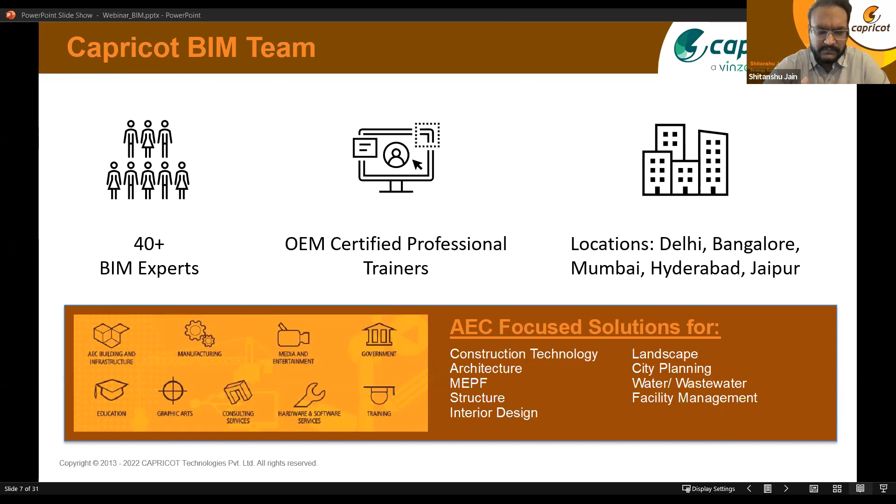So with this, the idea behind today's workshop is to demonstrate, first of all, because we have people from multiple domains and multiple knowledge levels in this workshop.

So first, to bring everyone on board at the first level, what is BIM, and then how it can be leveraged for projects across the life cycle, ranging from a building to an airport, for example, to a mass transit project, and how we put all the data together on one single platform so that, especially in large infrastructure projects, the data can be leveraged for better outputs.

What is the key concept of BIM? How does BIM work? What does it basically give us? It gives us a single coordinated model. This is a snapshot from one of our projects which we are going to show you - a tunnel project where we also place services, and multiple stakeholders have already collaborated. This is the kind of workflow we try to create - a single coordinated model where multiple stakeholders have already given their input.

So now the question arises, who can work on it? The designers team, engineers team, contractors team - all together can work simultaneously at the same time and can keep on adding inputs to the single coordinated model. Since it's a single coordinated model, how does it work?

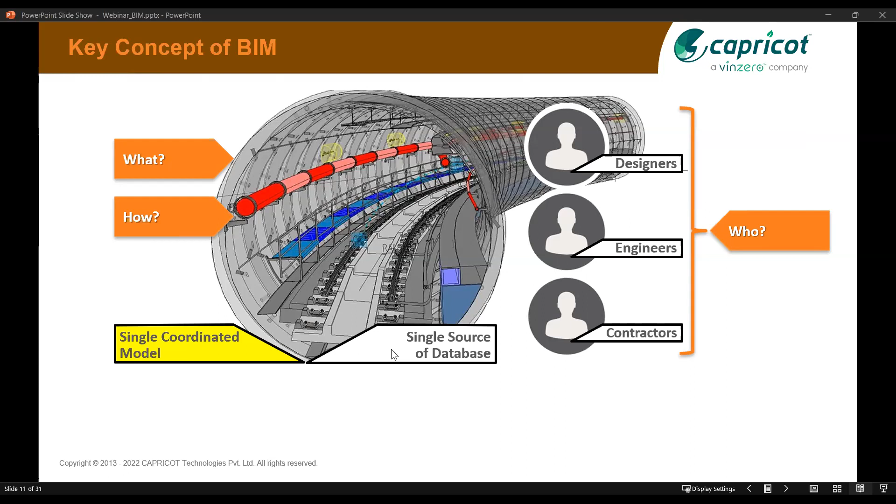Since it's a single coordinated model, it's a single source of database. That coordinated model is also a database which can be used for further analysis, simulation, or maintenance purposes. Everybody has the same - what we call a single source of truth. So everybody has their own truth - like I'm a designer, my truth, and for example the contractor's truth or any other stakeholder's truth - everybody's truth is the same. So everybody is actually extracting data or adding data to the same model. They are collaborating on the same platform, which is mostly now done on the cloud, because people might be in different locations, so it is done on cloud.

Now another question arises, when can we work on BIM? Like I mentioned earlier, from the design, that is the conceptual design stage, to the operation and maintenance stage, BIM can be used.

So that is the key concept of BIM. What type of project can it handle?

Today we are mostly focusing on infrastructure projects. These are different kinds of projects which can be handled, like road design. This is one snapshot from road design, where you can get quantities and analysis of the road. You can also design railway tracks, railway buildings, railway stations, and work on railway utilities and services like pipes, OHE services, or electrical services for railway. It can also handle site level services, basically utilities and buildings.

BIM can be used from a smaller building block to the entire cityscape.

Now European countries have actually come up with this concept called CIM, while we are talking about BIM. They have come up with this concept of CIM, which is city information modeling, so they are developing the entire city on BIM.

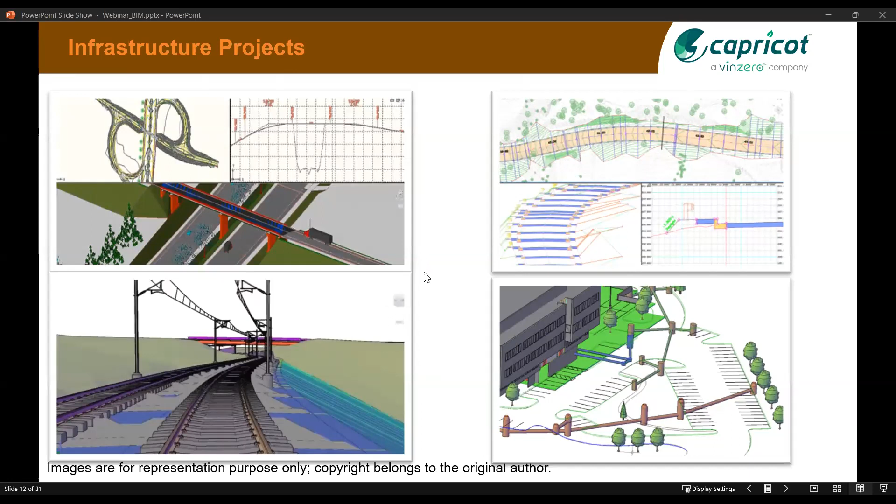Now I'll talk about building projects first. For building projects, we have taken up one small station project, only for demo purpose, which I'll show you. We are starting from building projects because I'm an architect, so I'm starting from the building perspective, and then I'll move this webinar towards infrastructure.

For building projects, for conceptual design we are using FormIt. Formit can be used for setting up the location, capturing existing terrain, and developing conceptual form. But for capturing terrain, it can only capture up to 20 miles, its extent is actually 20 miles.

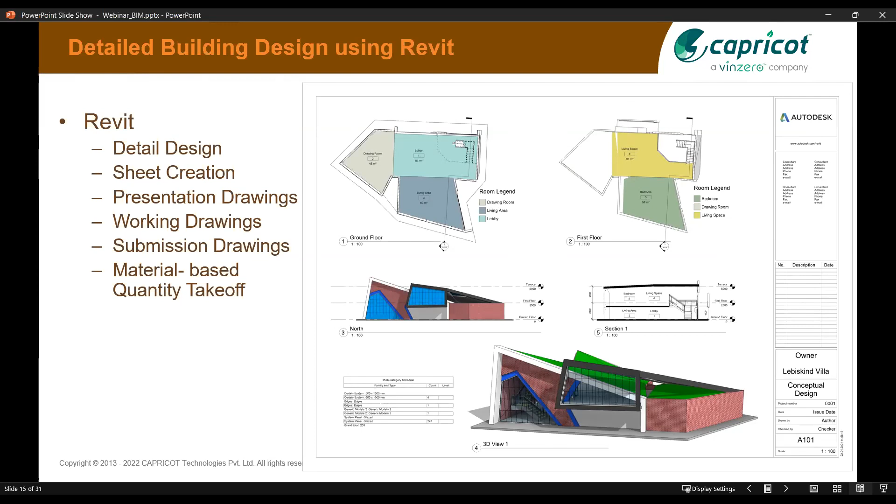So I think I should now move on to a live demo of these softwares. I'll just share my other screen, please allow me a minute. Abid, please confirm when my screen switches. Yeah, I think it's visible.

Okay, thank you. So this is the interface of FormIt, I've just opened it, so this is a fresh file. As you can notice here, it has generic options which we have in other software also, like file, edit, and others. On the right side, we have additional tools which can be used for tracking your progress, in terms of area. You can also set up FAR, so if you have a targeted area and site area, and it exceeds the site area, it will show accordingly in FAR here.

So you can set up location. For setting up location, we can go for the location option here, or SL is the shortcut. I'll not go into detail, but I'll just show you, you can just search for the location.

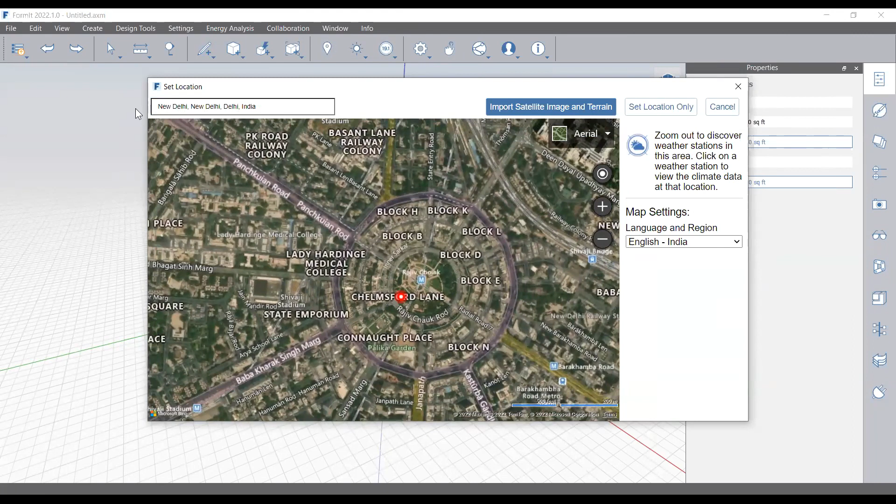For example, here I'll search for any location. Let's say I'm sitting at Delhi now, so I'll go for New Delhi. Suppose it has taken some central park area. I'll just go for Green Park, where our office is located, near Hauz Khas. Suppose you already know where your building location is, you can set this pointer according to wherever that site is located. This would be the origin point for your site, and your site will start developing.

And then you can import terrain and imagery accordingly. So I'll set up this much of location. You can just zoom in and zoom out for setting it up, and I'll import it in FormIt. I think this much of area is fine, so it will take a while to set up this location.

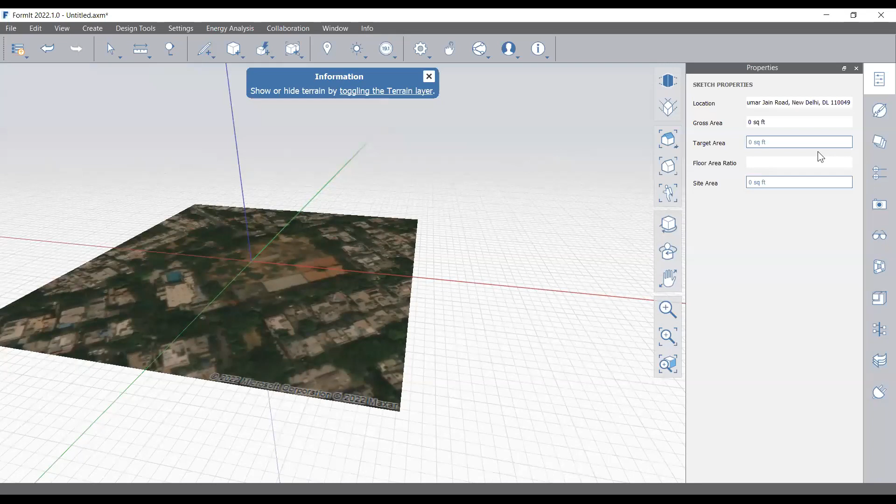As you can notice, since it's a Delhi area, we have lesser contours here. If I go to the layers, it has layer management also, and it actually adds up the contour layer. If I had taken some hilly areas, the contour terrain data could be kept. Layers are added, you can add more layers here and start modeling.

Now, as you can notice, location is set. Then you can also set up the site area. Let's say my site is 1500 square feet. I'm just taking a smaller site, or maybe let's go for 5000 square feet. And then I need to start. You can start by placing a few solids, or maybe you can start by some other method.

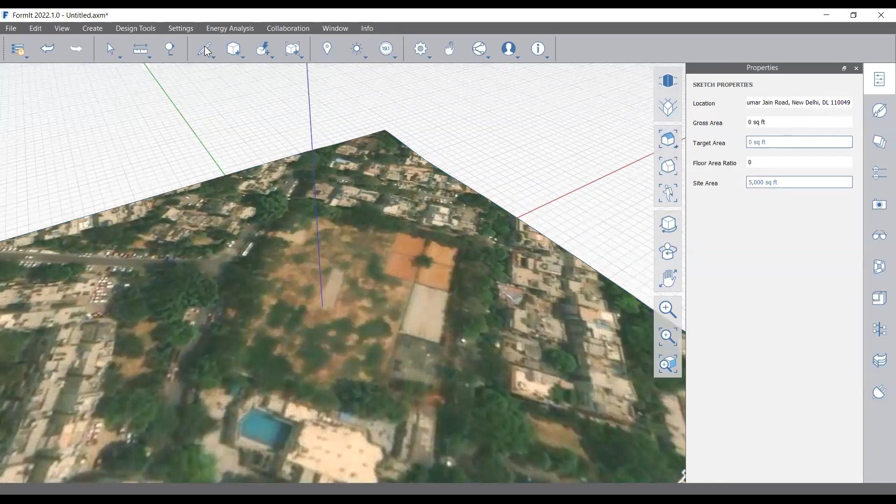So I'm starting with simple lines, and since this project software is being set in feet and inches by default, and I prefer working in meters, I can just hit the tab key to give these dimensions. It's a 1:1 scale thing, it doesn't distort according to scale.

I need to go for 5 meters on this side. So I've just written down 5 m, I'll click OK, so it's that kind of dynamic input. Sorry, 5 meters is very less here at this location, let me start with a rectangle. I was just showing, I'll switch off terrains. So this is that line which I created.

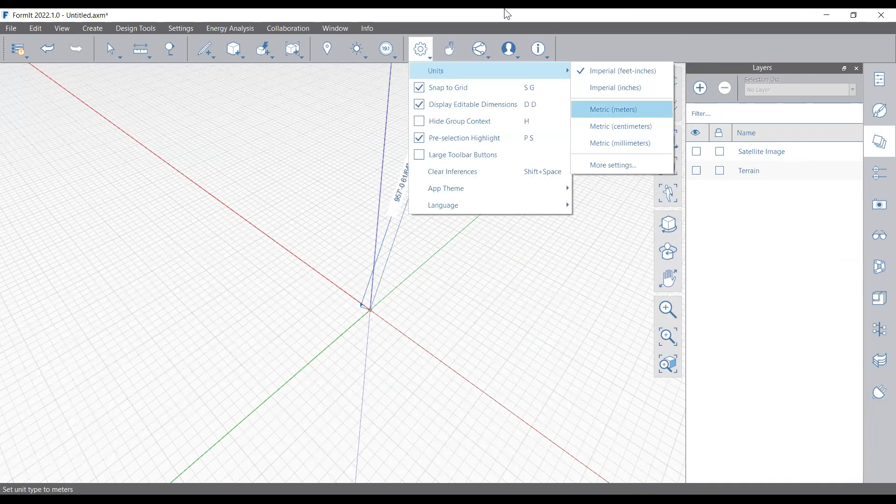I think I should start from the origin just to make the screen more visible. I'm starting from the origin, and you may change units also, that is not an issue. I'll change it to metric meters, and for example now I need to give units in feet and inches, then you can hit tab key and change the units. Anyways, I'm going for 50 meters on this side, let's say it's huge.

In SketchUp users also do this. Like you can say this building is 15 meters high, for example. Suppose this portion of the building needs to be shifted back, suppose there is something, so you can just manipulate your form.

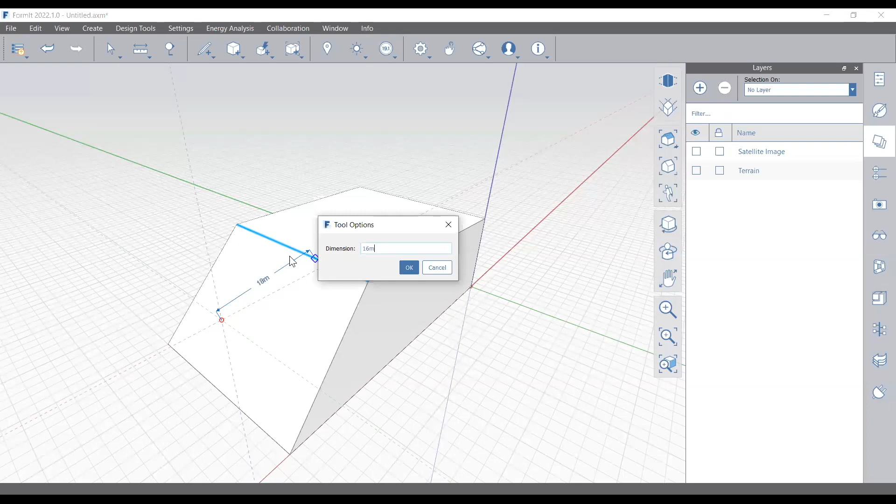Just allow me a minute, I'll just try and reconnect. I think this time it would be better, I think voice will not break again.

I hope. Anyways, suppose I have added a few lines here and I'll just remove this portion, so you can go for the entire deconstructivism mode, architects actually use this term. Now, for example, if I delete this, the entire surface has been deleted here, by mistake. So I'm just keeping this mistake on screen so I can show the solution also.

So for that, you have this cover option available. The thing is, you can do many things here, so I can just cover this. You can select these options and just finish this off. It is being covered, and then you can add levels to it.

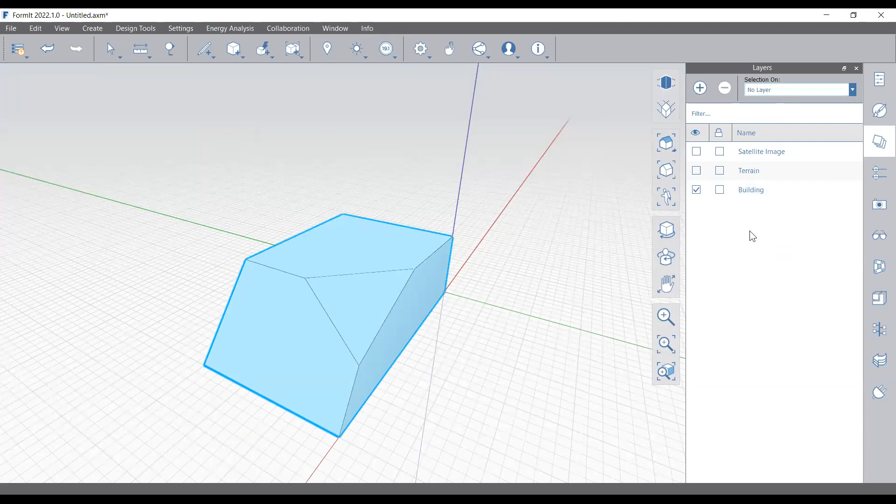For example, I need to add this to another layer. I'll select all of this and add it to another layer, I'll call this layer 'building'. So now I'll add this to the building layer. Now I can switch off building also, and switch on terrain and satellite imagery as well.

Then, for example, I need two levels because in Revit, for design development, levels are required. So I'll just simply add levels here. The first level is added at 0 meters, or maybe if it's the plinth level, then you can go for 600 mm. I'm just giving inputs in mm, and it has converted to meters automatically.

I can add one level at a time. Another level is at 3 meters, or maybe multiple levels altogether, for example 5 levels at 3 meters each, or maybe 3.5 meters each. Right, so multiple levels are added, and now our building should also detect those levels.

I'll select the building portion and go to the properties, then to the levels, and I can add these levels to the building. So use levels, and as you can notice, level-wise areas are shown. The idea is this much volume the building is taking up, this much area, that is the total gross area in square meters, and floor-wise it is getting area.

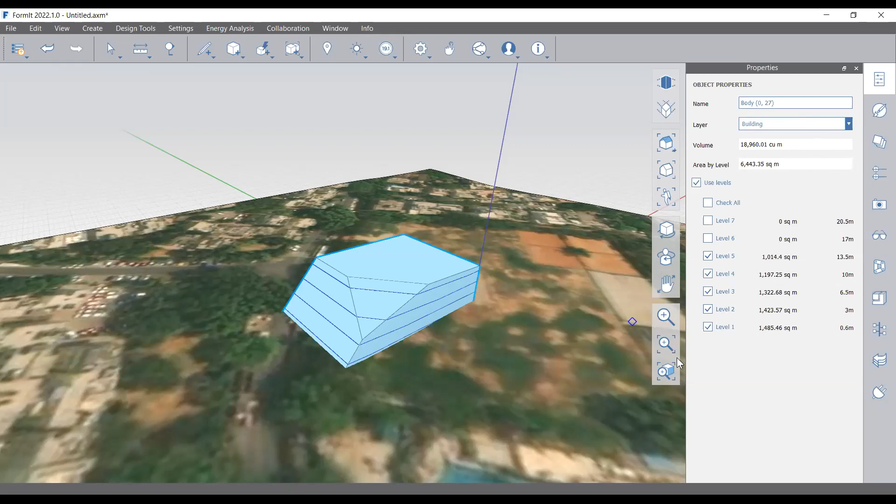My building form is actually gradually decreasing upward, so as you may notice, the area is also reducing as we go up. On the 5th floor the area is less, and on the lower floor the area is more. So the idea is it also tracks floor-wise areas, and FAR is being automatically calculated.

This much site area I have set up, and this is the gross area I've got. I think there's some issue here, since I took a larger building. Anyway, I'll just change it - this is only for demonstration purpose. So this much FAR is correct, right?

Anyway, you can also add more things here, like materials. For materials you have this option, with a predefined material library, or you can create your own materials. So all the things you can do with any 3D software, you can do with this.

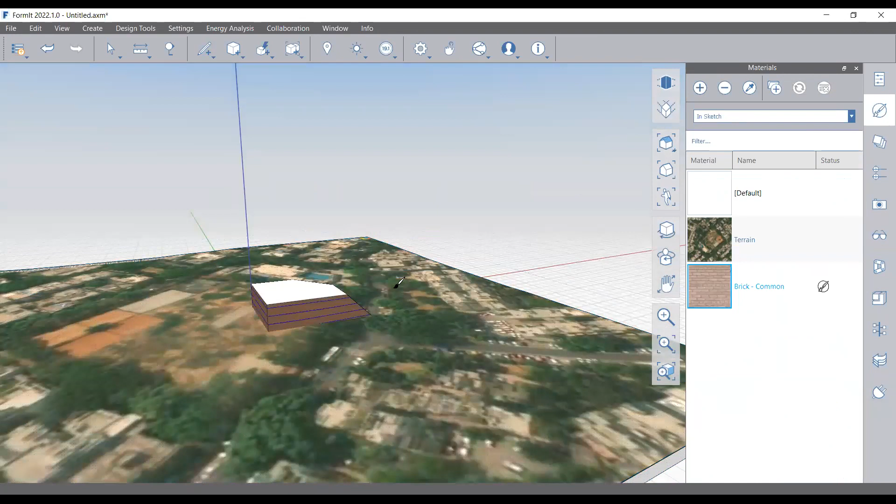These materials will not be lost when you take it into Revit. Actually, off screen I have developed another model already, so I'll just directly show that to save time. But I think you got the idea that it's a very easy software.

Later on, you can also run energy analysis and solar analysis on it. I think I should show that part. So you can switch on shadows, the sun editor, switch it off, and change its mode. You can choose different modes here, so I'll go for monochromatic mode.

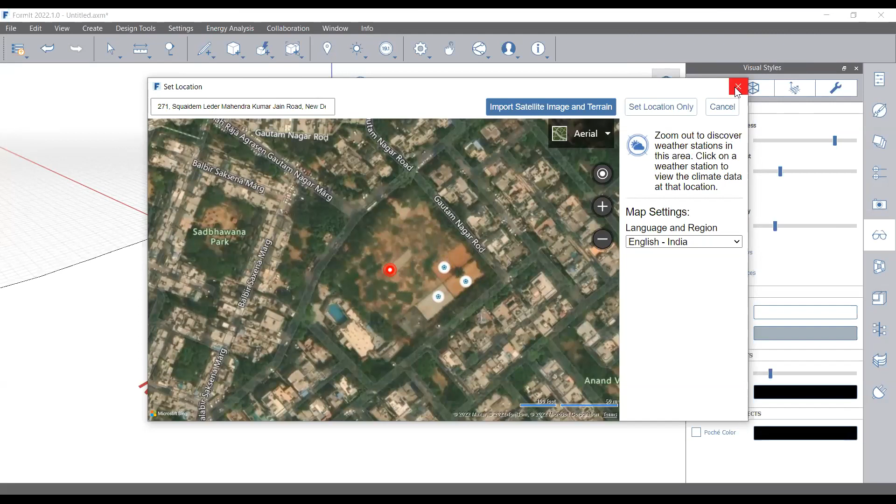Here you can see the sun input is taken - weather input will automatically update according to whatever location you set. When I was in the location panel, you may notice we also have weather information added. These small dots shown in blue color are weather stations, so weather data is automatically updated when we update the location.

Now, for example, if I need to run solar analysis on it, we can also do that. Someone mentioned in the chat that this feature is also in Revit - yes, it is, but for preliminary purposes we can run preliminary solar analysis here. Another advantage of using FormIt at early stages is that it's available on iPads as well, whereas Revit is not available on iPad. This is actually also available on iPad.

Like architects sketch on sketchbooks, they maintain small sketchbooks - those who have iPads can install this app called FormIt Pro. FormIt also has a free web-based version, but if you want all the features, since this analysis feature is not in the free version, you can buy the Pro version. So the iPad app has stylus input as well, and the stylus is pressure sensitive.

For example, if you press harder, it can allow you to push and pull your building - something like that, it takes stylus input as well. So the idea is those who have an iPad can use FormIt, run a preliminary analysis, and then push that model to the modeler or other team members.

Anyway, I'm running solar analysis here. You can set up the time - it has automatically detected, I think, the current date and time. No, it has detected something else. Actually, we need to set up the date.

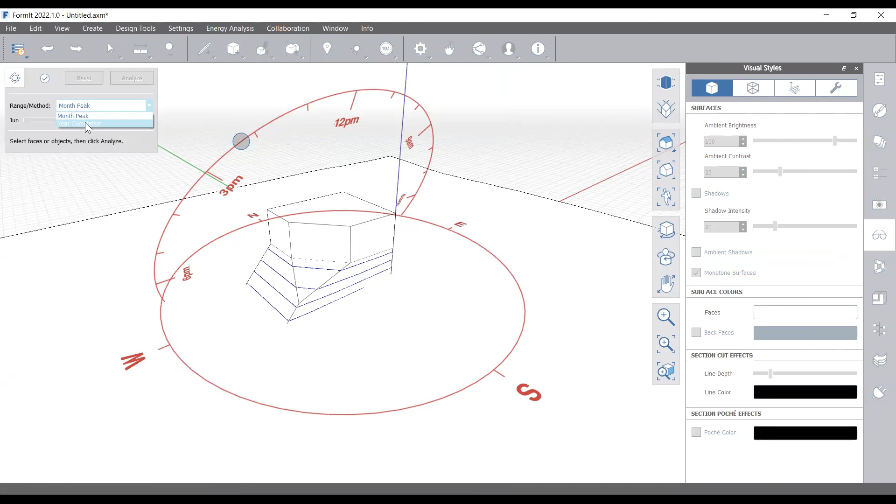Then I'll go for solar analysis, and we'll wait for a while because it takes the data online and gives you data back. You can go for monthly peak or cumulative - I'm just showing you cumulative here. If you're going for monthly, you can change the months from here, as you can notice.

I'm just going for yearly analysis, and I'll select all the surfaces of this model - I mean, all the surfaces. You can go for surface wise also, like at a time you can select one surface. I'm selecting all the surfaces, and I'll just analyze it. As you can notice, the surfaces which are selected are showing their results.

In this case, kilowatt hour per square meter, but if you are using imperial units, then it will show in BTU units as well. Then you can place these images in your presentation and can push your idea well. I think it will give you ground to defend your design. Anyways, I'm just resetting it - so this is the whole idea of using FormIt.

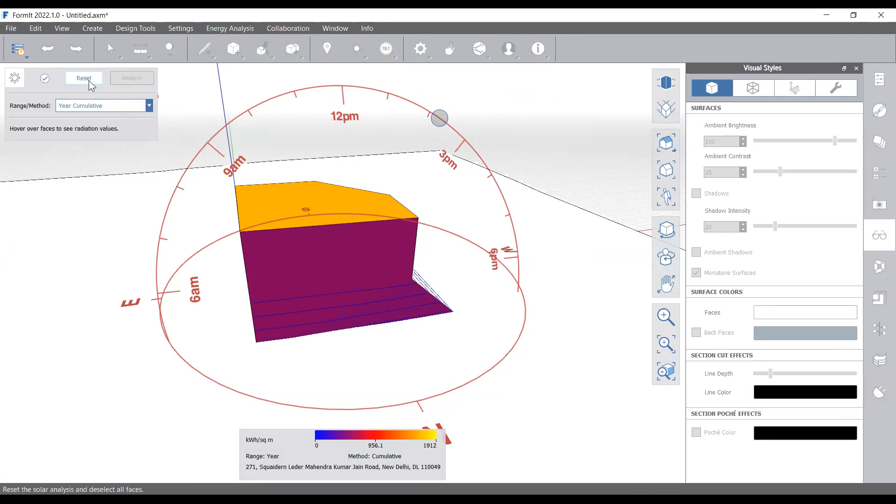I'll show you that building which we have already created in FormIt. I'll just simply drag and open it. Yes, so this is that building. I think sun input I should switch off here. Yes, so this is that conceptual block which I have developed.

Floor wise, I've also tracked its area, and now I need to take it in Revit. So you can save this thing on cloud as well, that is Autodesk Construction Cloud. So it takes up the docs part here, so you can save it directly on cloud.

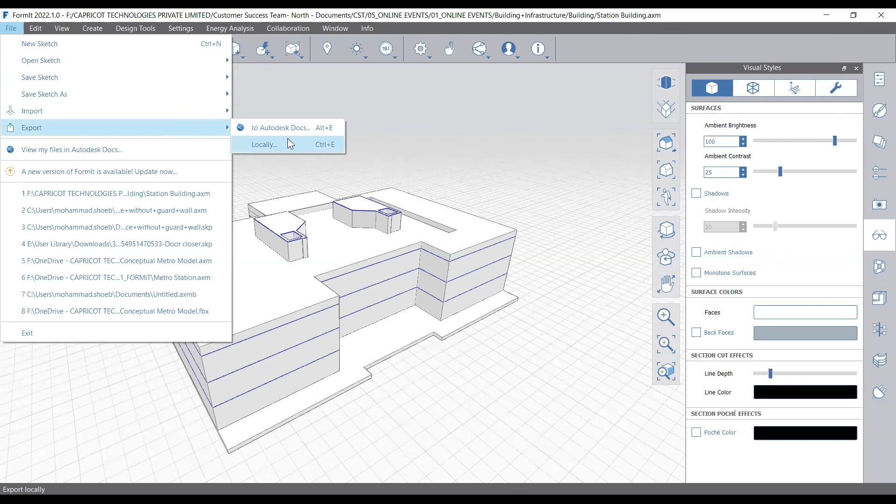I'll just share my Revit screen, I think, at this point. So I've already taken this in Revit, and I'll just switch my Revit screen. Abid, please confirm when my Revit screen will be visible. Yes, I think it is visible.

Okay, thank you. So the idea is that same building I've placed here, and I copied it multiple times, and then I've added material to it. There are detailed materials to it, details are added, then I've created one working drawing here.

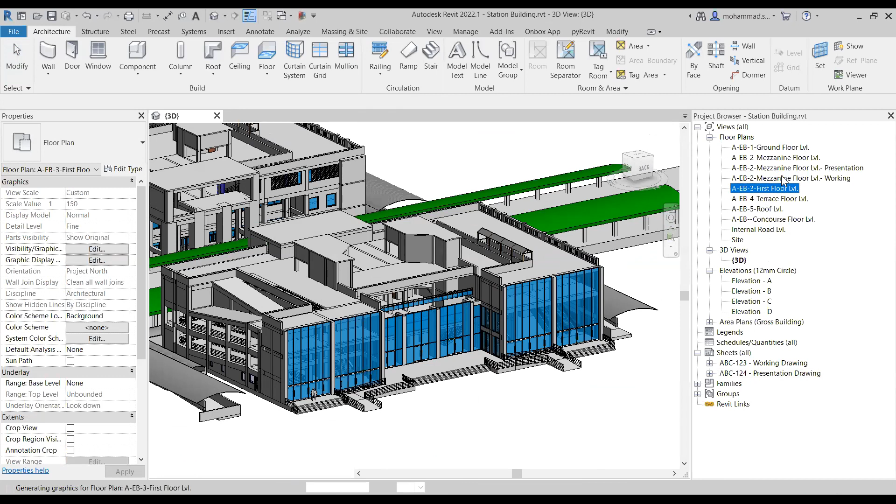I'll just show you that drawing - floor-wise drawings can be created here, right? Those levels which I've created already there, actually I've created levels in FormIt itself. So for example, I'll switch my FormIt screen again. So in FormIt, if I go to the levels, I've created levels in the conceptual design stage as well.

So these are all those levels which were required then, and then I took the same level inputs in FormIt, in Revit I mean. So in Revit, if I go to some of the elevation, you may notice that these levels are also present here, right? There are a few naming conventions which are changed, but the same levels are being used.

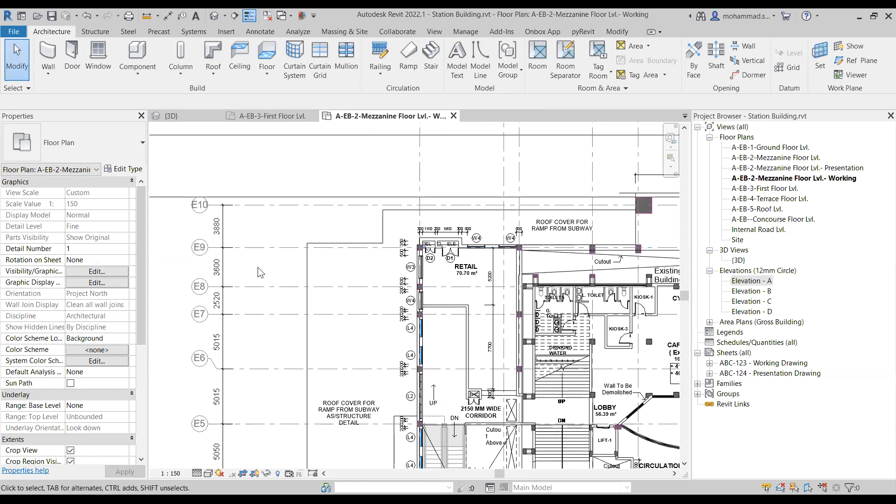So this is that drawing which I produced here, this is the working drawing output. I was also working on it, so you may find some errors here, because obviously this is for demonstration purpose only. And then presentation drawing is also produced.

And how do we produce presentation drawing? I may show one demo as well - for example, it is very easy, you can do it in few seconds. So if I, for example, duplicate this thing and it has no colors in it.

So for example, if you want to represent your rooms according to the colors, then you may simply go to Analyze tab, because it analyzes the spaces, and then you can go for coloring up your rooms, and I'll just simply click here and I can assign colors according to the rooms. Maybe if you have divided departments, you can go by department as well.

I've not placed departments here, I've only specified room names, so I'll just click OK. And according to the input, whichever room has been taken, for example, this is the cafeteria area, this is the lobby area, the different rooms are being colored automatically.

For example, if I'm not satisfied with some of the colors, suppose this cyber cafe type area is too dark, I can anytime go to the color scheme and can change it, right? So it takes up the dynamic input. Anyways, I hope you got the idea here.

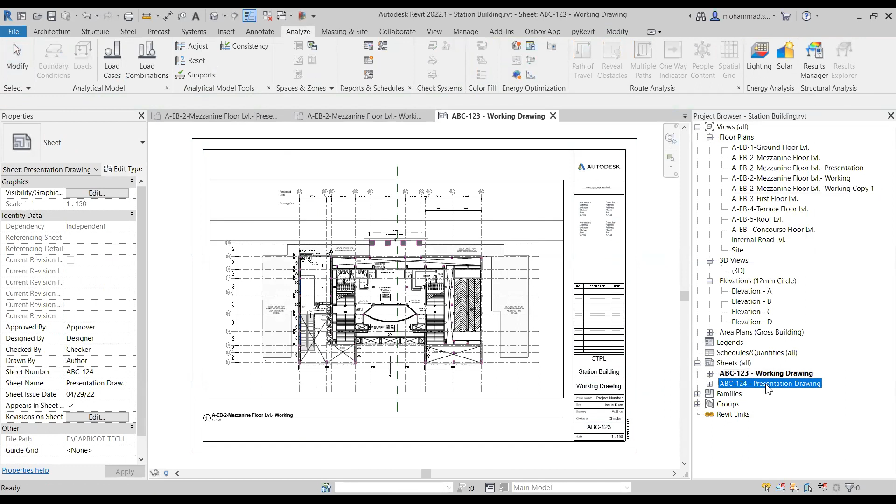Then I can take it to sheets also. So I've already created one sheet and can compose it with the title block, right? Then similarly, I've created this working drawing and this presentation drawing also. So Revit is basically a multidisciplinary software where you can take up your buildings and you can give inputs according to your discipline - as you can notice, it has tabs dedicated.

So for those who are new in Revit, I think I should explain. The architecture tab shows architecture related options. The structure tab has structure related options, like creating braces, trusses, rebar, and so on.

You can also place 3D reinforcement. Then there's a dedicated tab for steel connections for steel designers. There's also a precast connect option, available after the Revit 2020 version - this is Revit 2022 which I'm showing. The precast tab is for precast detailing.

Then we have the systems tab, which has an HVAC panel, a mechanical panel, plumbing and piping panel, and electrical panel. So it's a multidisciplinary tool, and you can insert multiple data types here. For example, if other consultants are working on CAD drawings, you can import those CAD inputs directly. If they are showing PDFs, you can import PDFs directly. You can link images, and you can link other Revit models too.

For example, I'm an architect, and if I need input from a structure team, I can link their structure model as well, and they can keep working on their model simultaneously. So it has that linking with coordination available.

Once every design is frozen, you can start producing sheets. The next tab is about annotating everything. You can produce sheets - I have already produced a few sheets here. You can also get quantities out of it; there's an entire panel for creating quantities.

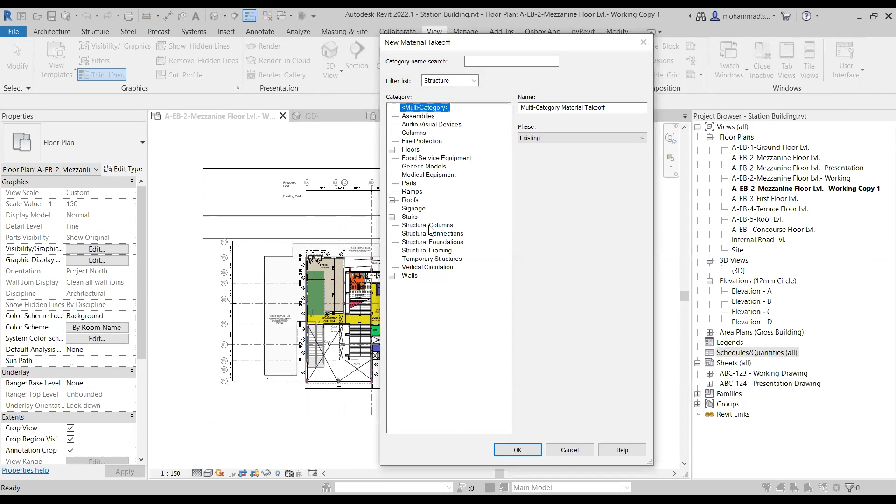I have not created any quantities yet, so let me create quantities for, say, whatever columns are used. For example, I can go for material based quantities. I'll take up material takeoff here, for structural columns specifically. This gets me column quantities, and I'll click OK.

This is structural, so I can take the name of the component - in Revit we call this a family, components are known as families. Then you can take material based inputs, for example, the name of the material used, the area of the material, volume of the material, and you can also add cost and so on. I'm just adding a few things here.

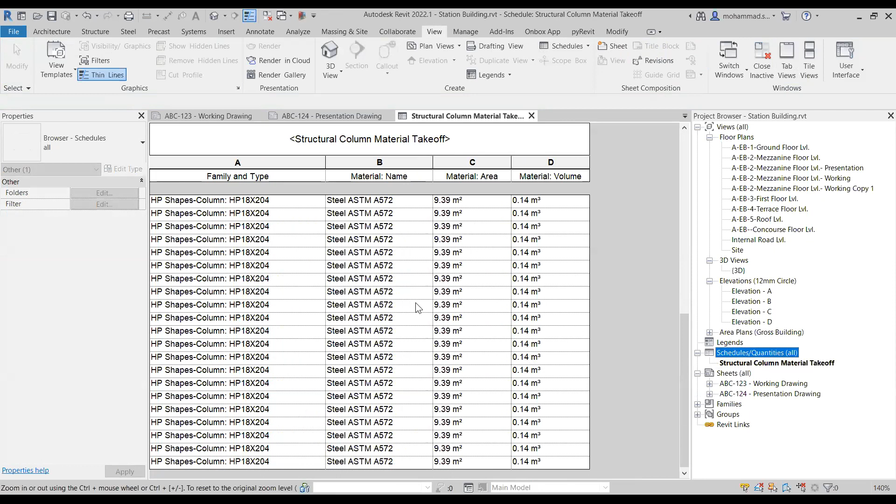So this is the entire schedule which is created, and you can anytime get a total out of it and use it in your sheets or DPRs. So it can get you material based quantities and material based cost also. That was all about Revit.

This same model is now integrated on Autodesk Construction Cloud, ACC, and taken up by my another team member, Mr. Abid, who is a civil engineer expert in infrastructure projects. He has taken this station building and developed rail around it, and developed roads around it.

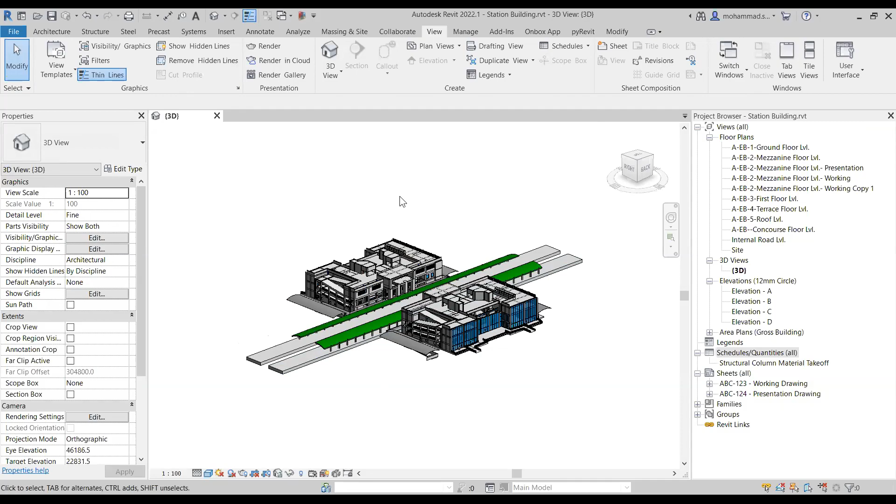I'll request Mr. Abid to take the session over. Yeah, thank you, Shiv. I'll just share my screen - please confirm it's visible or not. Yes, Abid, it's visible, okay.

Before starting the infrastructure project, I want to highlight a point. In almost all infrastructure projects, government organizations or large infrastructure projects are mandated to submit a BIM model, and only then do we get approval. Even when working on large infrastructure projects, we are dealing with large amounts, so we need to do a preliminary level DPR. For that, we need to do a preliminary survey, then go for the infrastructure modeling part.

Let me switch to the next slide. As I mentioned, the preliminary survey itself is the biggest task in government organizations or other organizations, because first, as a person, we need to visit the site, then capture the contour data or identify major important structures, then start working on it. So when working on an infrastructure project, the first idea is we need to capture the existing site conditions to work on a 3D model in real world context.

For that, InfraWorks will help you capture 3D terrain data in real world coordinates with the help of USGS satellite surface. As you can see in this image, I have captured one of the project's data - I'll show you a live demonstration as well. Later, whatever model we have captured, we bring into Civil 3D for detailed terrain analysis, terrain model, and contour map generation.

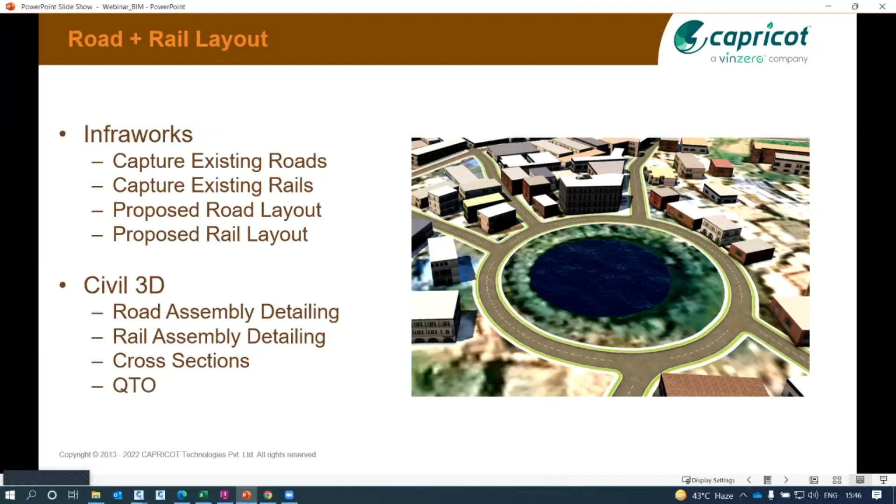Right now, I'll shift to my other screen for the InfraWorks demonstration. I hope my screen is visible. Yes, it's visible. So this is the typical interface of InfraWorks.

On the left hand side, we have an option called Model Builder. In day-to-day life, most of us use Google Maps or Google Earth for daily travel or whatever the purpose may be. Pretty similar to that, we can launch Model Builder and search your project location by specifying the project name or by specifying the coordinate system of that site. For this example, I'll just search and take an example of Mumbai.

I want to capture the area of this site condition to construct an underground tunnel. I have multiple options to capture the data, either through a rectangle or by drawing a polygon. For this example, I'll take a rectangle to demonstrate. I can capture up to 200 square kilometers of data in one go, but we can collect multiple pieces of 200 square kilometers of data and merge the entire data into a single drawing for large infrastructure projects. As of now, I was trying to capture an area of 30.98 square kilometers.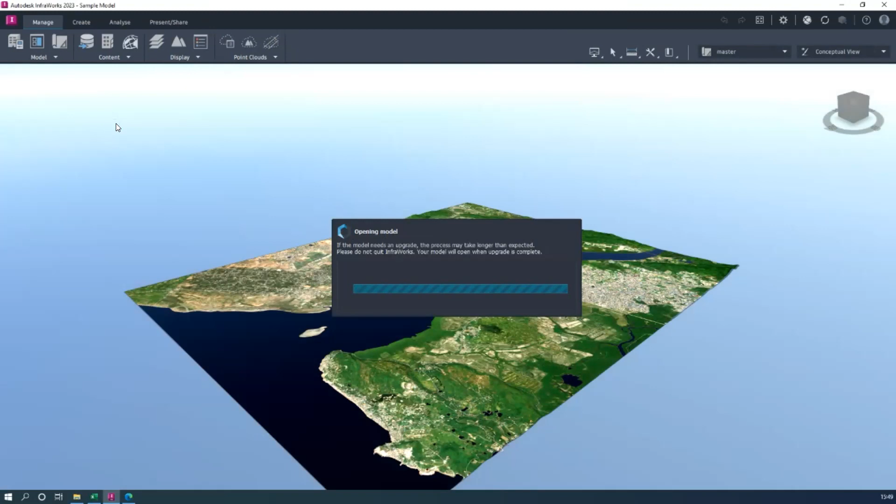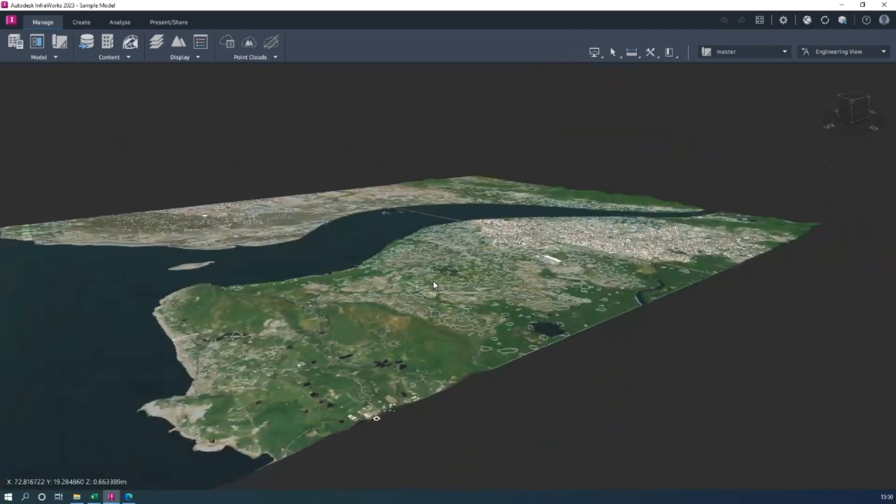Now this is how my InfraWorks model will look like. You can see it's not only a 2D satellite image, but actually a 3D model. To understand it in more detail, I'll switch to engineering mode. It will highlight the contours captured from the USGS server. Even in this city area, you can see the existing building structures which have been captured along with the site contour elevation values. I've also created one more typical view just to create a brighter environment. Now you can see more contours and a different contour interval compared to the previous view.

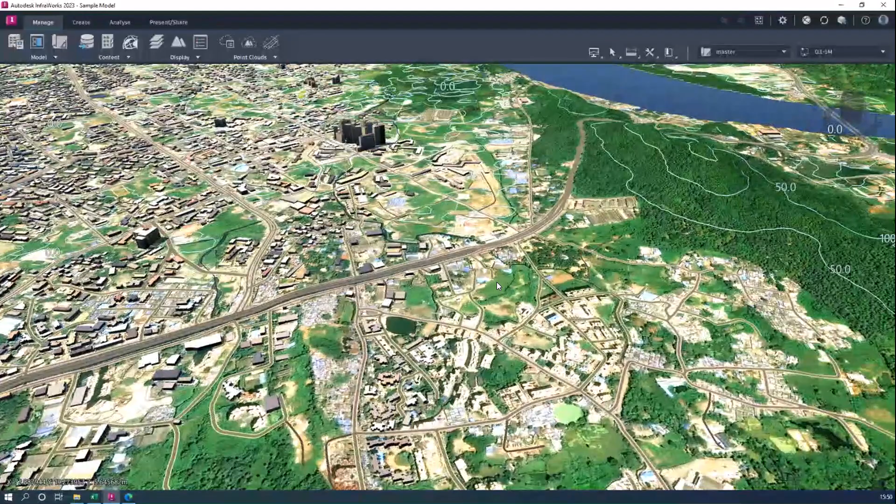These are the existing buildings which are automatically processed by InfraWorks. Wherever existing buildings were there on the site, the entire model is captured, including your existing railway alignments, road alignments, and also hill and terrain regions, river portions, which have been located via Bing Maps. I'll switch to the conceptual view again and go to one area with a roundabout - this roundabout has been captured and prepared by InfraWorks itself.

You can see the planning roads and the existing site conditions are all automatically captured. Even when I hover over any particular road, you can see a name stating that this road has been captured from OpenStreetMap, with the name Fatak Road.

You'll get a brief idea of which alignment we are capturing. So I'll switch to another view, road planning. Now you can see by default in InfraWorks we have two different types of roads: one is my planning road, and the second is my component road. What is a planning road?

Planning road is nothing but a center line alignment of a road. So when I import a planning road, which has been modeled in InfraWorks, to Civil 3D, I only get an alignment. I won't get any corridor or cross sections out of it, because the idea of this model is only to create a center line alignment.

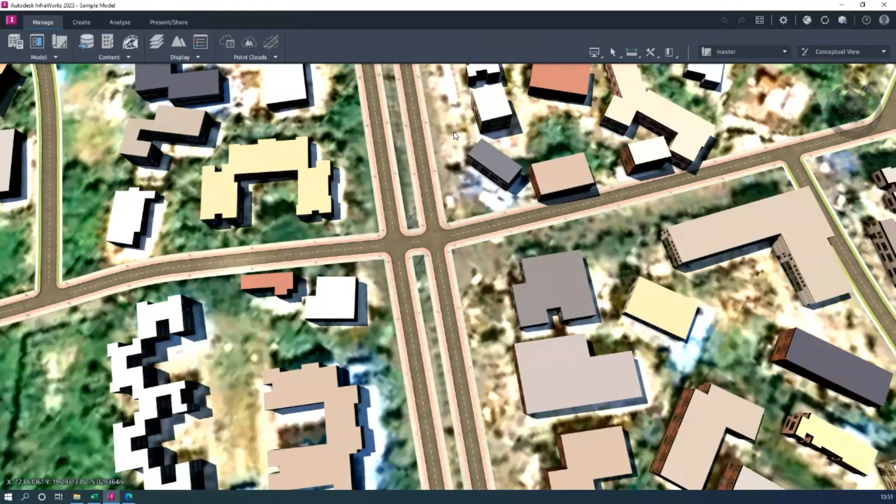So when I select any planning road, on the right side I have a palette called the property palette, though it should really be called a style palette. When I go to the road style, I have different options: divided highway, sidewalks, tunnel. Any time you think the existing road isn't captured perfectly, you can switch the style from 2-lane to 4-lane.

What I will do is convert this planning road to a component road. When I convert it, I get more detailed design options compared to the style palette which I had received before.

Now you can see the attributes. The target speed of that particular road is 40 kmph, and you can turn on the super elevation, which will use metric standards. By default, the grading width of that site is 5 meters, and you can switch to fixed slope and adjust the cut-fill grading criteria as well.

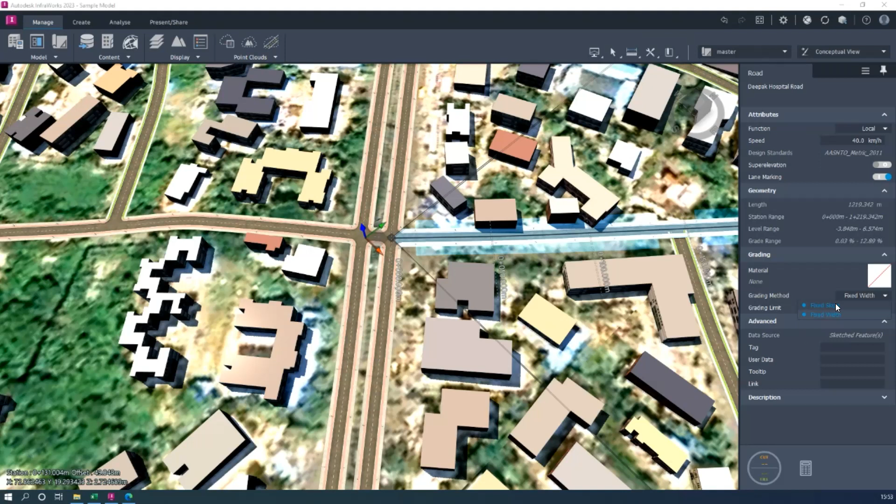I'll now zoom to another location. Here I've developed one rectangular region at this road for an interchange part. I've added a simple rectangular tunnel structure, and I'll show more detailed tunnel projects as well. The idea here is that when you're in idea generation or concept generation stage, you can use the InfraWorks model for detailed superstructures and underpasses of that area.

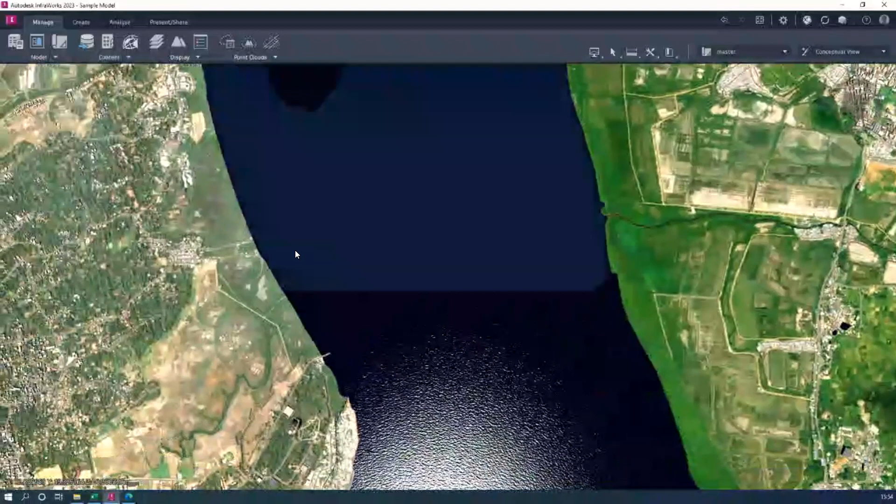So I'll switch to another view. Just allow me a minute. As I mentioned, right now I want to plan a component road region in this particular place.

So what I will do, when I go to create, I have two options: either create a planning road or go with a component road. What is a planning road, as I mentioned? If I'm in idea generation and not sure whether to go with a 4-lane expressway or an 8-lane expressway, at that point I can use my planning road for representation purposes.

Later I can convert that road to a component road and make more design changes on top of it. But for this demonstration, I'll just take a component road to explain the process. So let's suppose I want to plan a road. There are two methods: one is the PI-based method, and another is the element-based method.

I'll start with the point of intersection method, where I've selected my 4-lane assembly. Even when working with a 4-lane divided assembly, later you can switch to 6-lane, 8-lane, or a 4-lane depressed median assembly, which can be modeled and replaced easily. So I've selected a 4-lane assembly with raised jersey barriers, and I want to start modeling.

I want to start modeling from here. This is my center line alignment, which goes approximately here. Now when I switch to the curve, you can see a curve has been added automatically. This is a spiral curve. With a right click, you can convert it into a normal circular curve, but most of the time in India, we prefer to work with the transition curve.

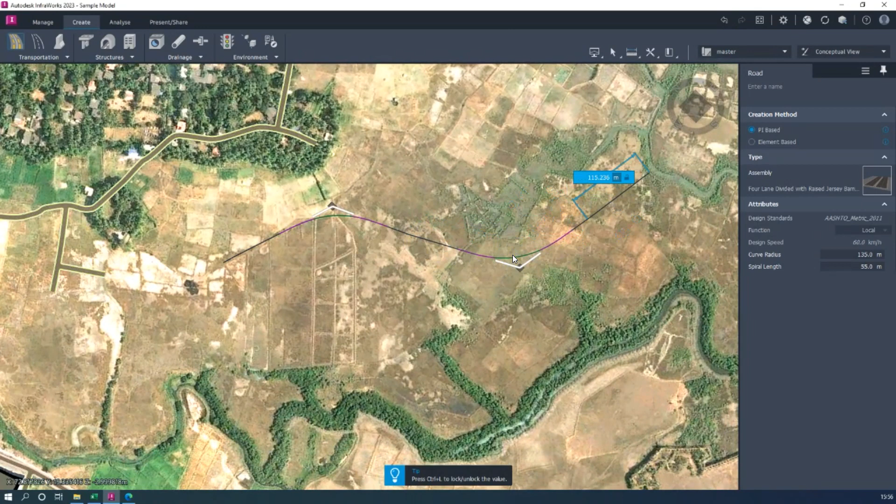Now I'll just add a lane with two curves, and double click to exit out of the command. Right now you can see a 4-lane curved road has been developed with a jersey median in it.

So when I select any of the road, as of now I am still in a conceptual model, and for the conceptual project I just want to understand how much cut needs to be done, how much fill needs to be done, and what amount of material has been consumed to construct that particular project. The idea here is when you have all the values in a real world context in a detailed manner, you will get a more approximate cost compared to a 2D CAD environment, or compared to tracking and alignment in a 2D GIS environment. You will get more detailed information on top of InfraWorks.

For calculating the amount of cut and fill, I'll simply click on cut. Now when I click on this crane option, I'll get earthwork quantities. Although now the cut values and fill values, net amount of balance cut, has been set to dash, meaning it hasn't been computed yet. For the computation part, I'll just click on this play symbol. Now you can see the values have been shown.

So for this particular road project, for this center line of road, I need to perform 5,000 cubic meters of cut, and 19,000 cubic meters of fill need to be done, and 13,000 of net fill need to be done, to form that daylight assembly, or to form the baseline datum of the road.

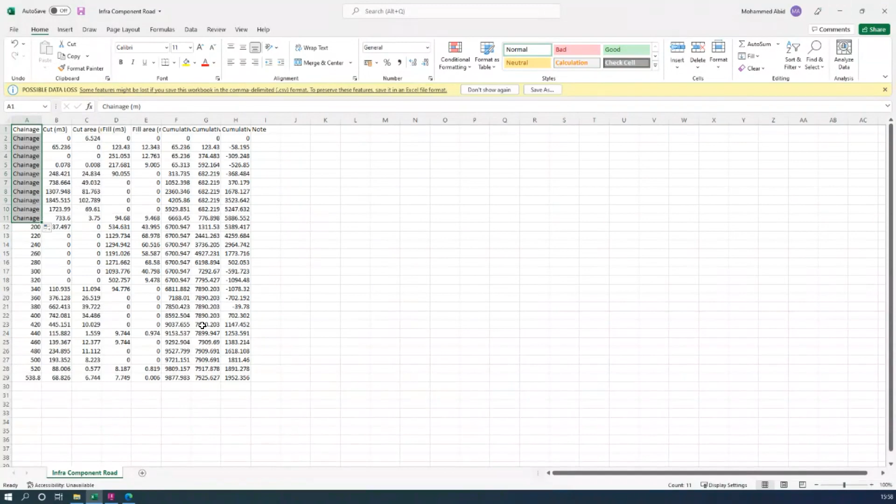So I'll switch to the other option, which is called material computation. When I launch the material computation tab, now you can see the amount of material required for that particular project has been calculated. I need this much curb gutter area to be constructed, and I've also added some jersey barriers, so you can see the amount of volume which has been calculated.

Just to brief you further, I'll try to add a decoration of side lights. I'll name it light pole, and select any of the light poles for now. I'll just add it over here, and press enter to finalize the model. Although it's been added facing the opposite direction, you can select the assembly you've added and give the rotation angle 180 degrees. Right now it looks fine.

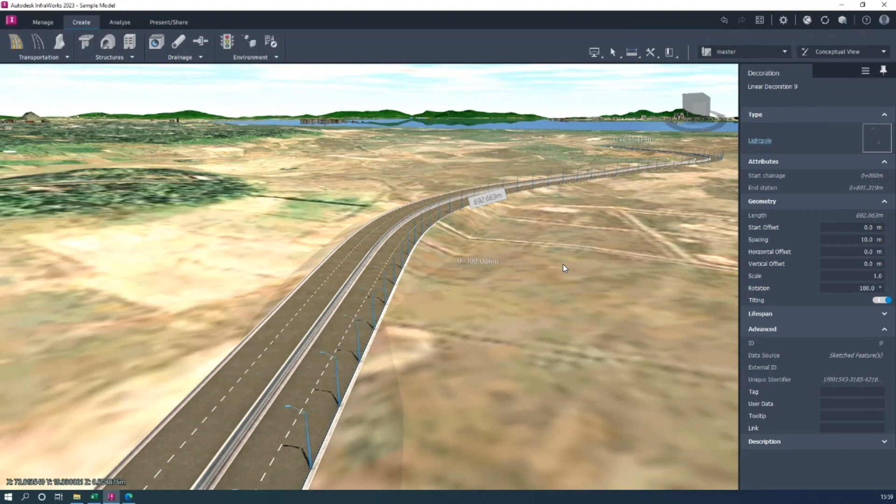So the idea here is, whenever the entire model has been done, and when you have added electrical fixtures or maybe drainage fixtures, utility fixtures, and go to compute material, you will get the amount and number of light poles that need to be placed, also estimated. This is an approximate count calculated based on the offset value and chainage value you have provided. You will get a detailed report out of it.

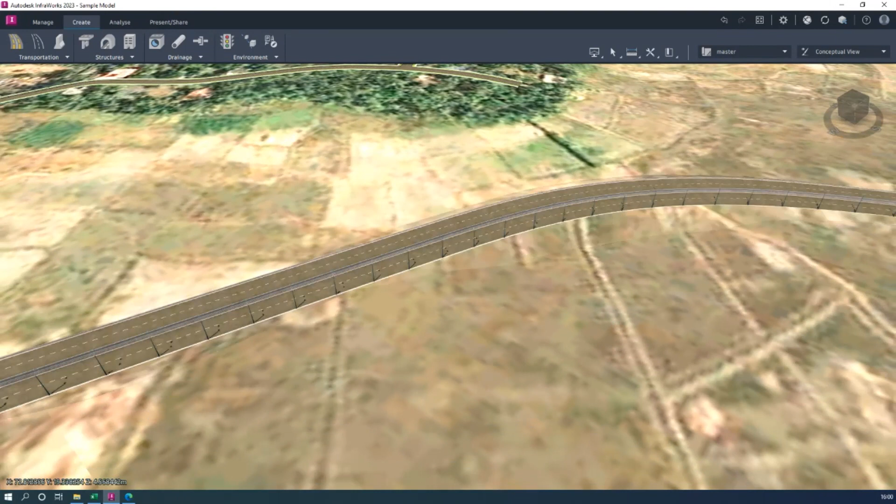When you click on generate report, similar to how the cut fill data was generated, your material data is also created in a CSV file format. So later, once you're done with your conceptual model, this is more like a visual prospect. When you want to do detailed design and documentation, we can import this entire data into Civil 3D. I have already imported the data to Civil 3D, so I'll share my Civil 3D screen.

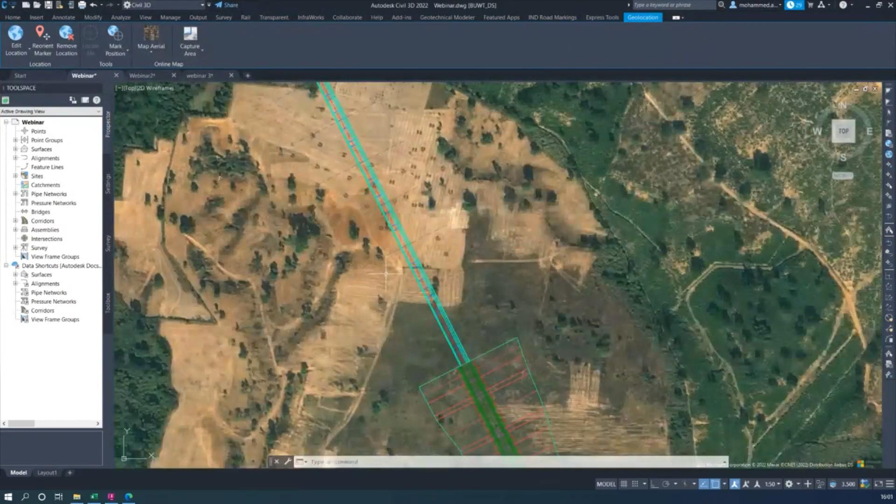So now you can see I have a surface which is linked to real world context data. When I turn on the map, the entire map has been downloaded in the background, and you can see one alignment passing under the ground. What I was trying to plan here is, up to the hill region I have a 2-lane road, and later after that I have an underground tunnel passing below the water surface. So I'll zoom to the profile view - just a second, I think it's fine.

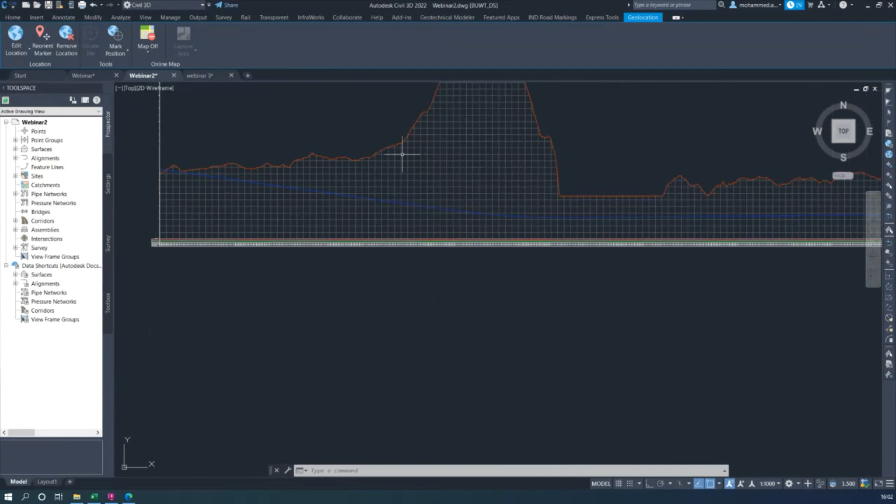When I zoom to the proposed profile view, when I reach the hill, I have already gone around 10 to 12 meters below the surface. So somehow we are planning an underground tunnel. From start to finish, we have a passage till the hill region. I have a 4-lane road, and later I have connected the entire road to my tunnel part.

Once you are done with your profile and profile creation, I have also computed the super elevation view. Even you can add the super elevation views. Although it was giving some warnings because it's not up to the design standards, or maybe one of the design criteria is overlapping, or one of the criteria which I have specified is not matching the requirements. It allows you to create a criteria as per Indian standard, and you can compute the super elevation views as well.

Apart from that, I have also added some of the tunnel cross sections. I have generated the cross sectional views, and when I zoom to one of the regions from below, you can see this region is moreover...

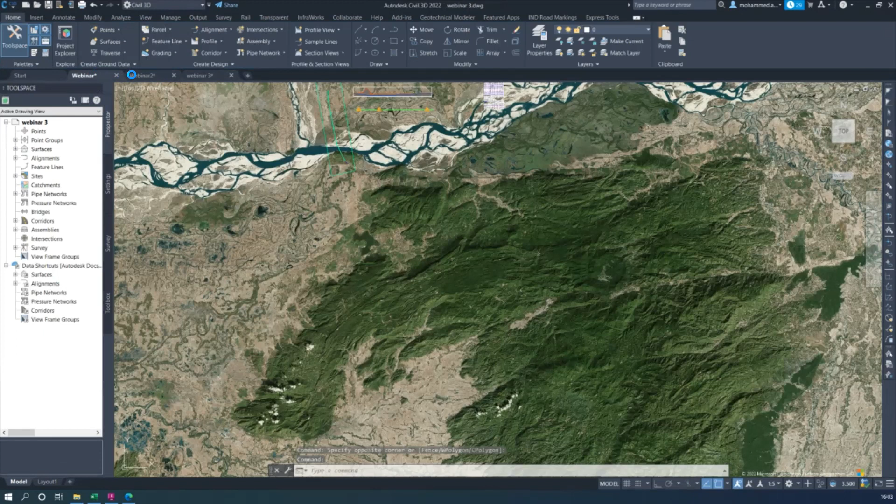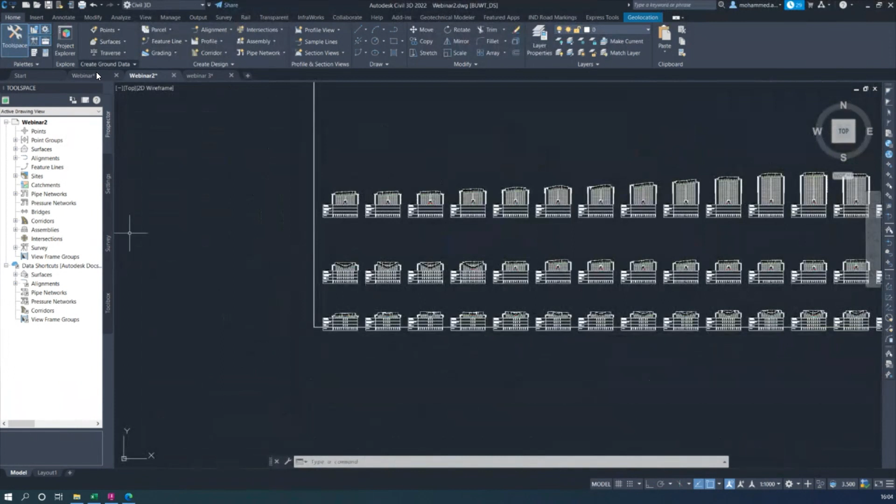Later, when you are working in Civil 3D, you can also compute the material volumes for the detailed design part. So I have computed, for a couple of sections, the material.

I'll just open the PDF file which I have created earlier. You can see the volume report which has been created from the cut area perspective, and it also computes the reusable value, like whatever we have cut in the project, how much amount can be reused further. You can see in the net cumulative value, initially I have more cut area, more cut value. When I shift to the tunnel, to the end of the chainage of that particular tunnel part, I have gone through more cutting, fill to cut. So that reusable amount of area is also going to be computed automatically.

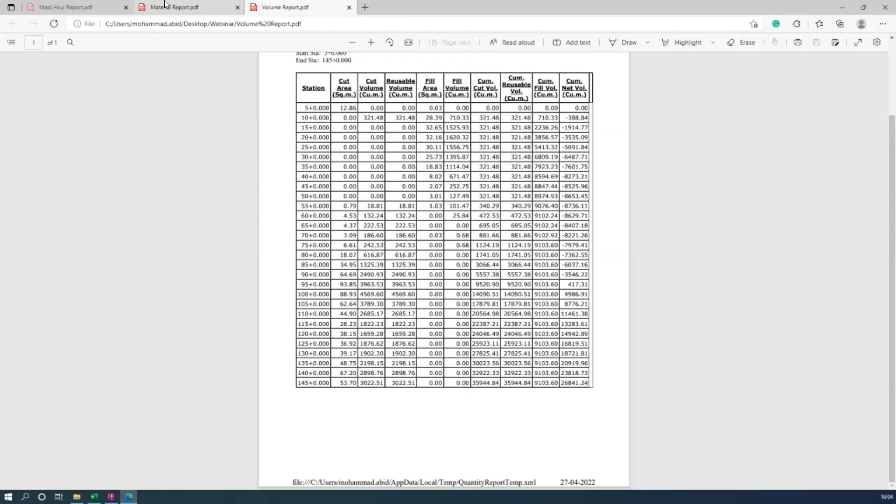Most people know mass haul diagrams, where we always try to balance the amount of cut and fill of that particular region. So I have also computed the sum of the mass haul volume of that particular region. You can see the report.

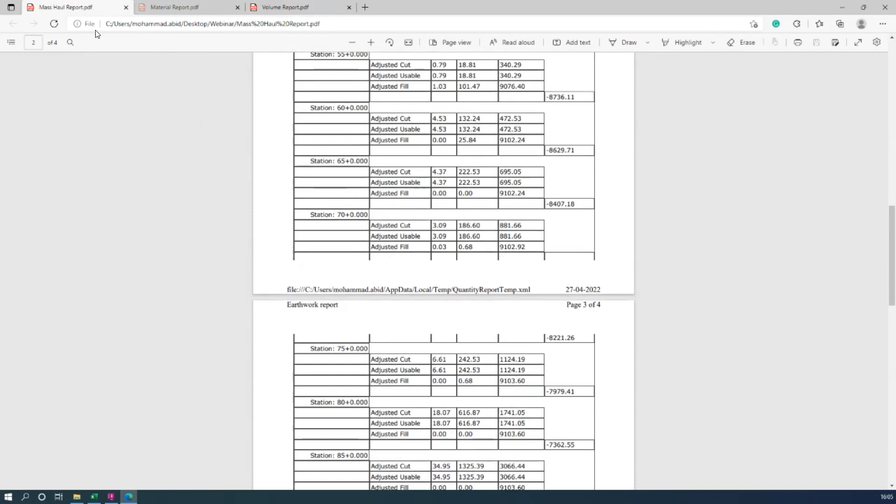The idea here is, when you are working with Civil 3D, you can even compute more detailed area reports out of it. I'll just switch to one of my existing projects which I want to show you.

Shoaib, please confirm whether my screen is visible. Yes, Abid, your screen is visible.

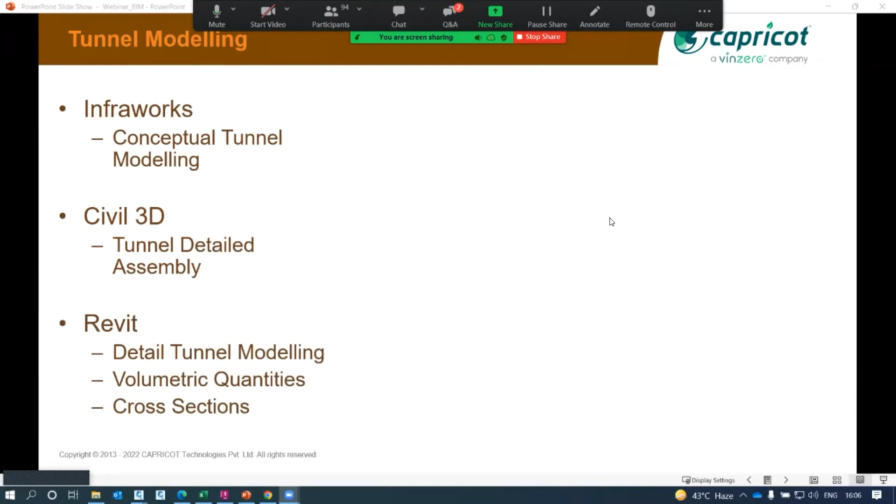Okay, thank you. I just want to show you the tunnel modeling of one of the infrastructure projects which we have delivered to one of our customers. When you are working with tunnel modeling, as I mentioned earlier, when you are in the concept stage, you can take help from InfraWorks, generate the concept model, bring that concept tunnel model to Civil 3D for detailed design of assembly. Then import that model to Revit for MEP and electrical services. For MEP services, we have Revit and Civil 3D integration with the help of Dynamo, bring the entire tunnel assembly into Revit and develop an HVAC model.

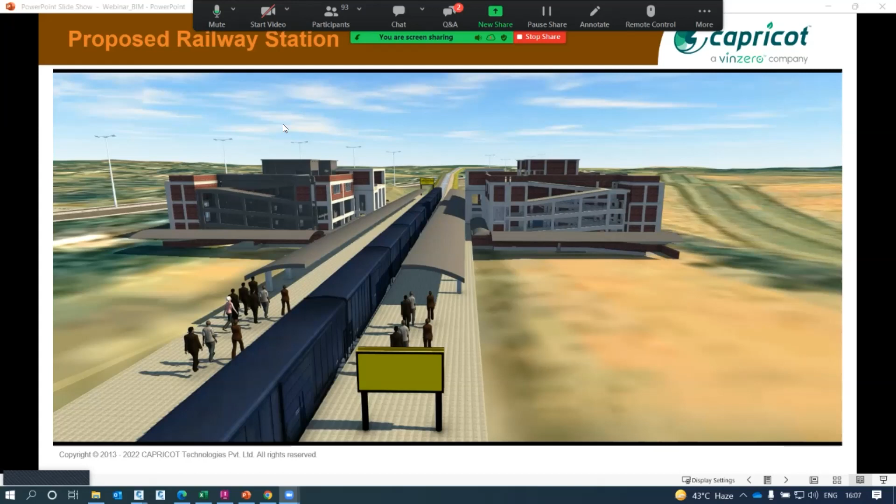So now we have a typical view of MEP services. As you can see, all these MEP services have been modeled and developed in InfraWorks, developed in Revit. So the entire data has been collaborated and visualized in InfraWorks out of it. This is the building which Mr. Shoaib explained earlier. This model has been developed in Revit, then we bring this entire data into InfraWorks for visualization and a coordinated model.

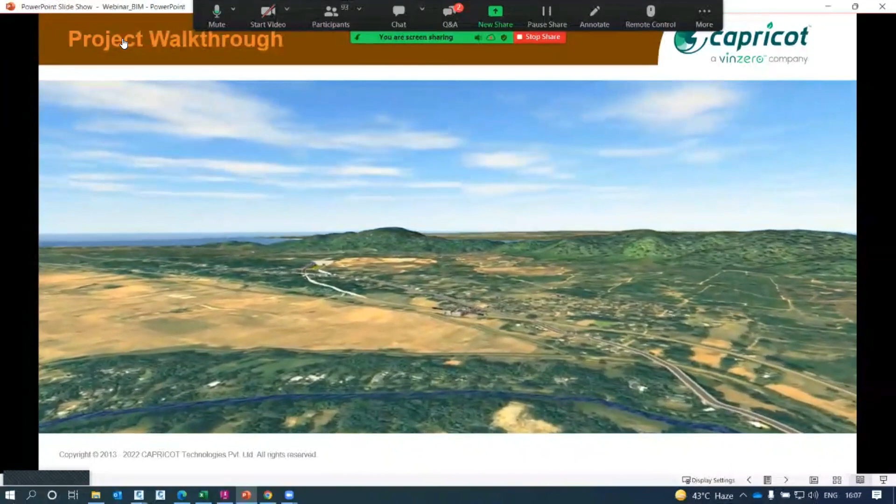I'll just show you a walkthrough. So this area of the site has been modeled in InfraWorks. The entire site, as we earlier captured in real world context, I captured around 180 square kilometers of area. And we have connected the different types of building components. As you can see, this building component has been modeled and developed in Revit, then brought into InfraWorks for coordination and visualization.

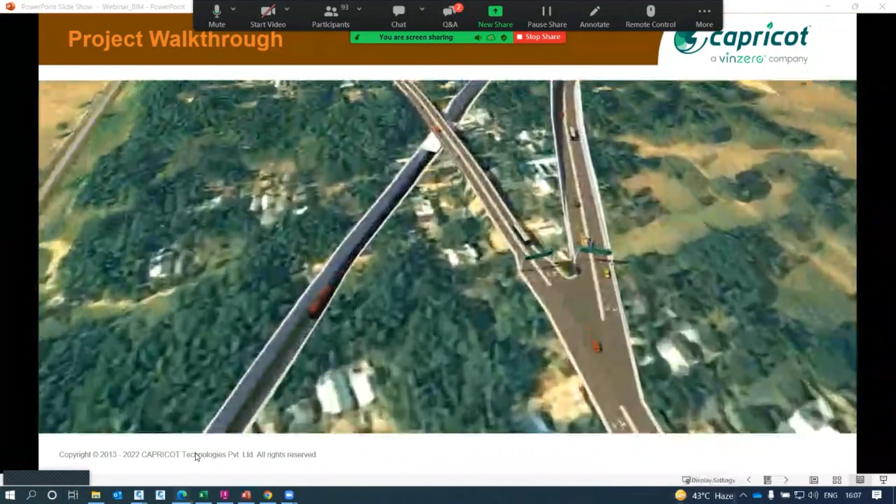As I mentioned, InfraWorks has some good features to develop your flyover structures and underpass structures. Those models you can develop in InfraWorks. Even though the signboards and light poles have been developed and modeled in Revit, we bring that pole data into InfraWorks and place them according to the project requirements.

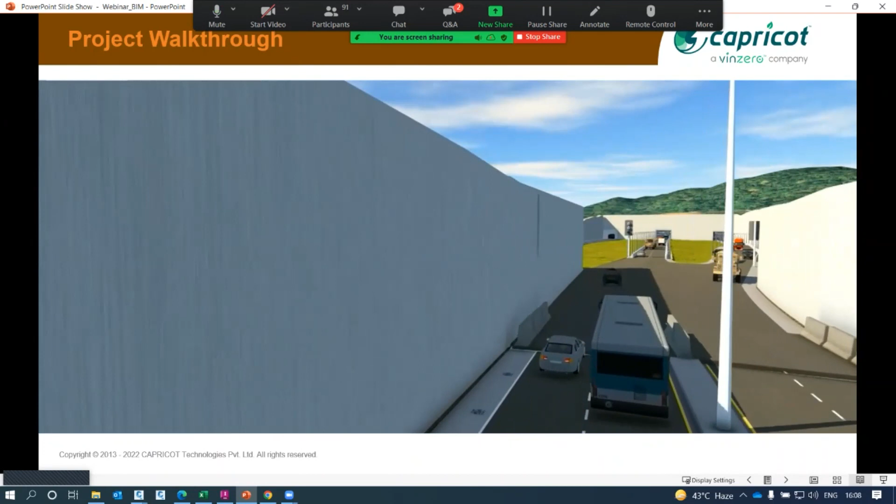Let's switch forward a bit. So this tunnel has been developed using Civil 3D, Revit and InfraWorks. We have 3 tunnels which are passing under the river, of which 2 are roads, one for in and one for out.

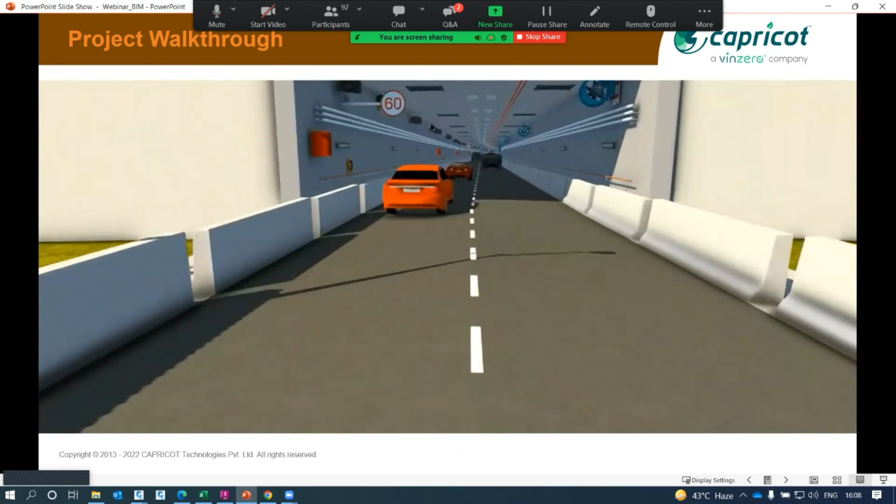We also have one linear structure, which is the railway project. As you can see, when I connected it to Revit, my Revit MEP engineer developed the entire MEP services out of it. And when I integrate the entire model in InfraWorks for the visualization prospect - although right now in industry we are submitting mostly 2D drawings, when you are working in a BIM environment, you can extract more visualized files out of it.

So Mr. Shoaib will take it forward for Autodesk Construction Cloud and the documentation part. Over to you, Shoaib.

Okay, thank you so much, Abid. Abid has quickly covered up many things. So the whole idea was to use InfraWorks, Civil 3D and Revit, integrating all of those in InfraWorks to show the final result. That video which he just played was actually developed in InfraWorks.

But that was only for visualization purposes. When multiple stakeholders work together, they actually collaborate on cloud and also comment and give their inputs. So I think there are many people who were asking about when we will switch to the cloud platform. So this is the time when we are discussing cloud.

So what is cloud? Why is cloud used basically? There might be many uncertainties, like we had the COVID-19 pandemic, which sometimes caused major construction projects to come to a halt, and the entire process to slow down. One reason the process gets slowed down is using age-old methods of communication, like WhatsApp, emailing, or phone calls. But this cloud platform not only provides you cloud space to store your model and collaborate with other consultants, it can also provide better communication among different stakeholders.

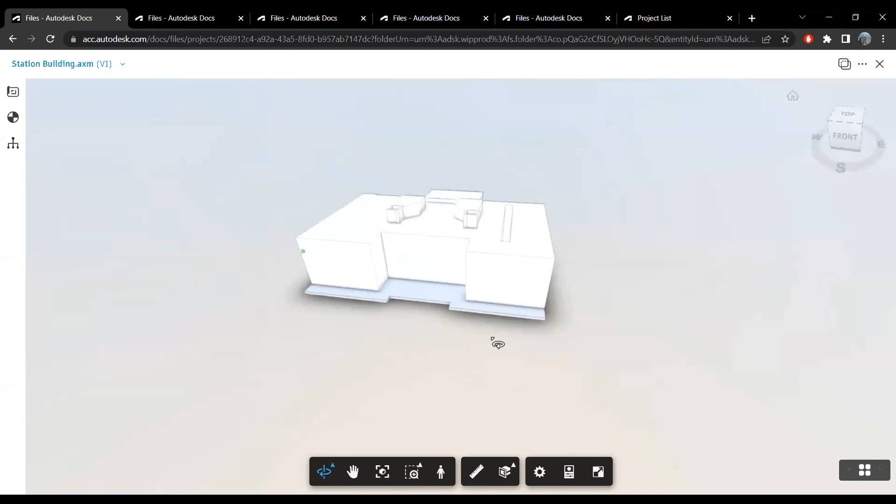You can measure it anytime if that is the requirement - for example, I'll just select from here and you can measure it. You can change the unit also. You can also cut section, although this is not the detailed design, it's just a simple block form, that is why section will not show anything.

But yes, that input which I have given in format is now updated here. And if I make changes there, I can collaborate again, and the version will automatically update. So this is version 1 of the file.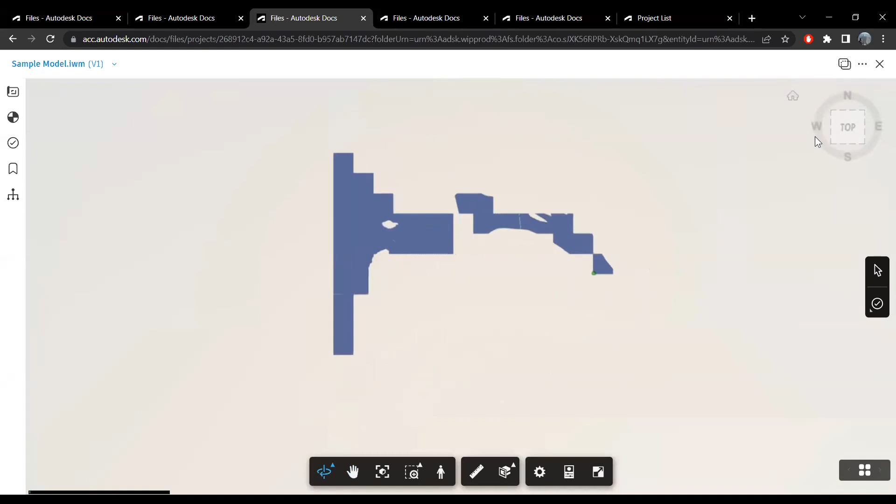Similarly, Abid has also added his InfraWorks model, which I've already opened on another screen. This model has so much information that it takes a while to update. So this is the river, and the tunnel which is going under the river, that is the InfraWorks model he showed. Although it depends on internet speed, it loads accordingly. It's a huge area, so that's why it's taking time to load up.

Similarly, under the detailed design stage, I have added a Revit model under WIP. I can directly open and check this model. We can walk into the model. So this is the same model here, and this is a very interactive model.

So those who are checking this model can get into the model as well. Not only can they measure it, we can measure this model. As you can notice, it is measured, so this is around 10 meters. Then, for example, if I need to cut a section, I can cut a section in the X, Y, and Z plane.

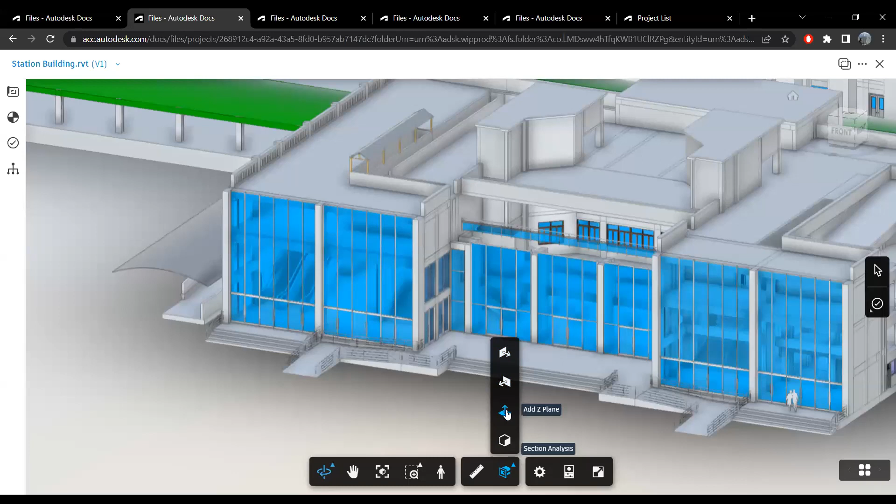I can add a section box also. Let me show you one section cut through the X-axis. As you can notice, this section is being cut. I think it is visible to all. You can push and pull this section plane, and this will keep adding more details to it.

As you can notice, this staircase section is shown here. There's a railing placed in it, and there are headrooms provided under the staircases, so you can see that. You can also change the scale, and rotate the section plane accordingly, for example if you need to change the orientation of the section. Similarly, you can add sections in other directions.

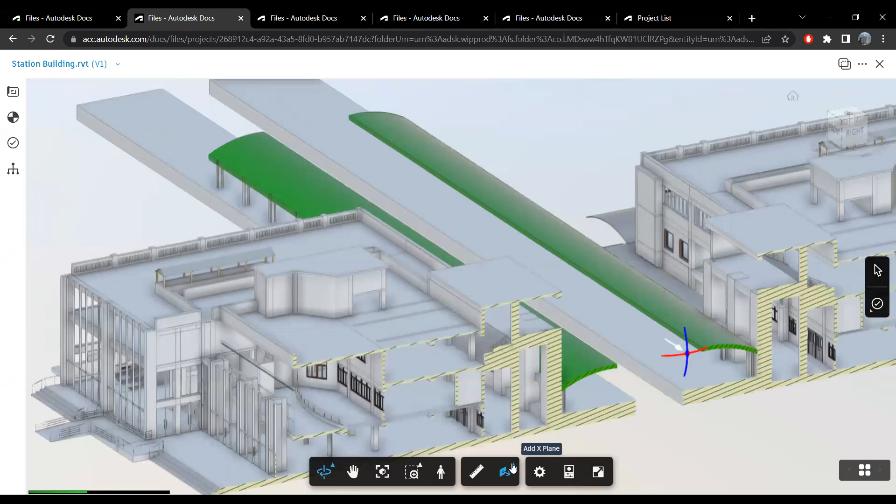You can also add a section box. The section box is basically a box that you can move in any direction. This box's planes are basically section planes. As you can notice, this box is showing floor-wise information.

Talking about floor-wise information, you can also go level-wise. In this model, I've already added levels, so you can access levels accordingly. For example, if I check the mezzanine floor only, only the mezzanine floor is separated out. If I check the concourse level, only the concourse level details are shown, which is actually incomplete since we're still working on it. But as you can notice, the mezzanine floor is kind of complete. Later, when interior designers add interior details, maybe furniture and all, that will also be visible here.

Not only this, you can walk into the model. By walking, I mean you can literally go inside and walk inside the model. So this first person view is the walking option. Just clicked on it, and as you can notice, I've got a mini map here.

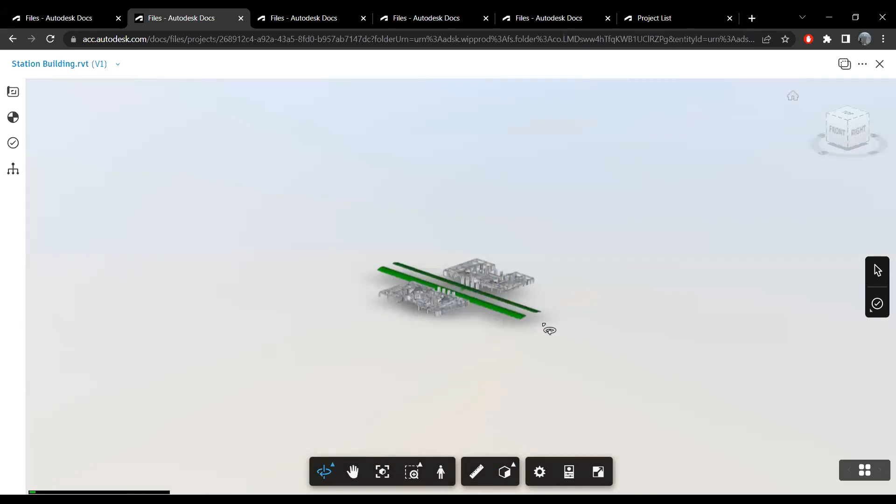Let me get out of the floor mode. Yes, I'll get out of the levels mode. I'll just pick the first person view. It will show me the controls which will help me navigate through the model. As you can notice, the controls are very easy. Arrow keys

will be used for walking into the model. Similarly, I can locate my person inside the model. For example, I'm locating somewhere here, and I can simply choose the level on which I need to land. I'll land on, let's say, the mezzanine floor, and now it's landed on the mezzanine floor. As you can notice, these are details from inside the model, and you can get inside it. So I think I should move inside.

So this is on the terrace area. I can just use WASD, and I can get inside the model. And that is the staircase part. Let's move there. So I hope you got the idea.

Now, while you are walking inside this, you find out that there is some issue on the door. You can anytime add a markup, or you can anytime add an issue here. So for adding issues, you have this small button which will allow you to add the issue.

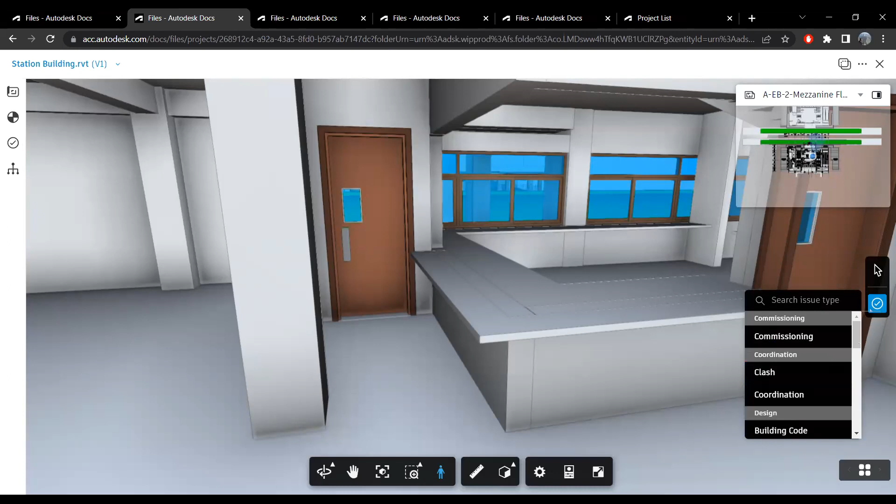If I click on it, it will allow me to add an issue. First you need to choose a category of the issue type, so what type of issue it is - that's the shortcut. Otherwise, you can go to the left side where the issues panel is shown. Here all the issues will be saved.

For example, the height of the vision panel is not correct. It should be at 1500 mm. So I'll click on it - it's a design based issue, so I can assign it to design based issue. I'll just click on this vision panel, and now it's added to the issues list.

Now the issue is added. I haven't assigned it to anyone yet - it's a design related issue, an open issue for now. I can specify the description, something like: door panel change.

I'll approve this, and then assign it to some team members. Abid is working with me, so I'll assign it to Abid, for example, and specify the location if required. I can also specify the due date - tomorrow is Saturday, day after is Sunday, then there might be Eid leave, so I'll give him one week, maybe by next Friday he needs to resolve this issue. That's the due date.

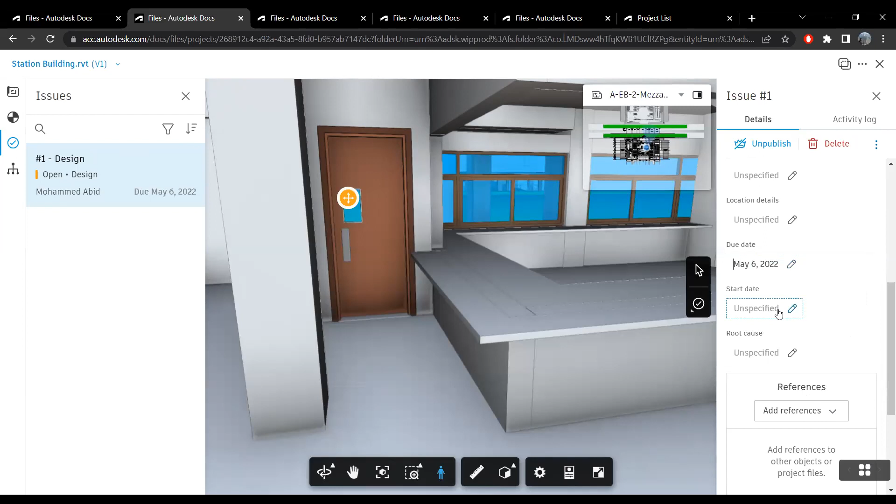You can also specify the root cause of the issue - maybe it's a compliance problem, a design flaw, or a coordination related issue. I'm going with design flaw. If there's reference material, for example a standard door image, a catalog, or a PDF, I can add it by attaching the reference.

I can add more files here, maybe a photograph - for example if I'm on site and I click a photograph, I can attach it here as well. I don't have anything for now, but I can add comments if required: please solve it, solve this ASAP, something of this sort.

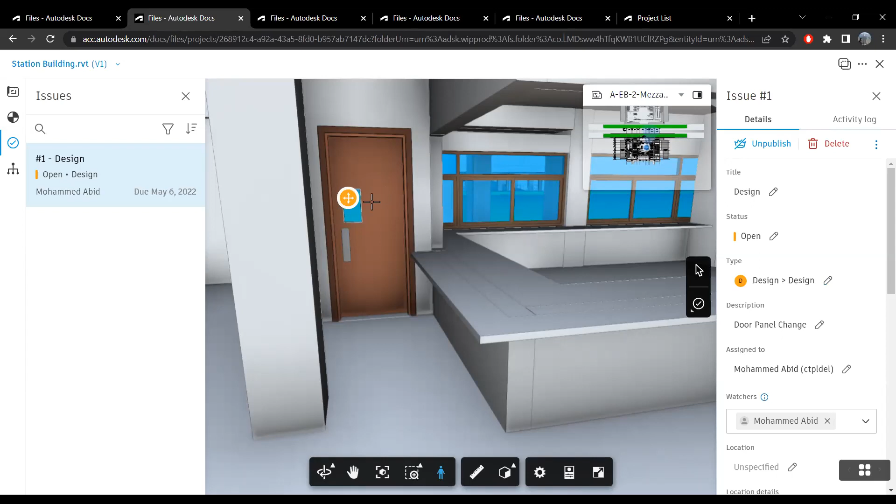I'll submit it. Once submitted, this issue is saved in my project, but it's not published - it's an unpublished issue, so it will only be visible to me whenever I open the model, or anyone who opens it using my credentials. If I need to publish it for every project member to see, I can do that anytime.

So for publishing an issue, I can just simply... okay, it is now published. So now Abid will get the email, and once he opens it, he'll get the issue and can resolve it accordingly.

Since we're short of time, otherwise I would have shown Abid's screen too, but I'll show the email instead. Abid, can you please show your email screen?

I was informed that only a few minutes are left for this webinar, so I'll move ahead. Anyway, this is one way - Abid will get it, solve it, and then this issue will be resolved.

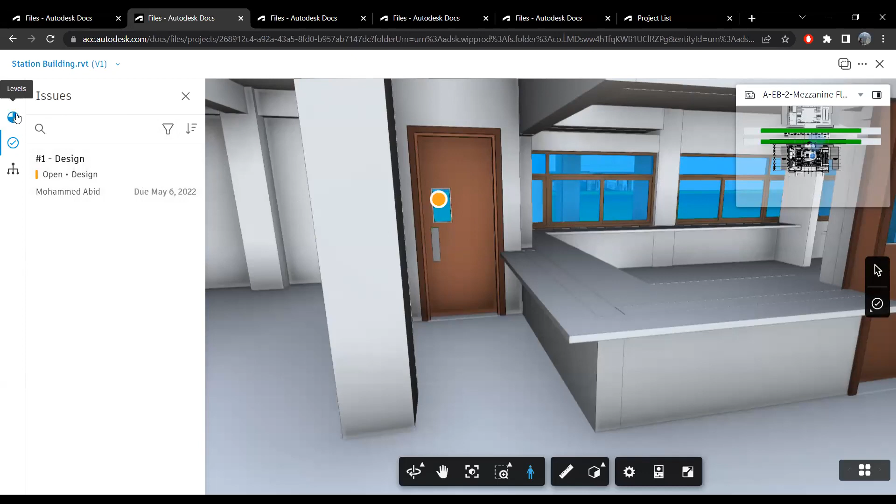Similarly, if you're not checking the model in 3D but in 2D, I'll get out of this mode. For example, if you're checking the model in 2D, suppose you need to check the sheets, because sheets need to be approved too. When we open the model, sheets and views are saved along with it, and you can go to 2D sheets in this case. This is the 3D model here.

If you have more 2D views, you can align them as well. I have 2D drawings which were created there - I can open it, so that working drawing I was showing is now accessible here too. I can again do the same thing - measure it, and create issues here.

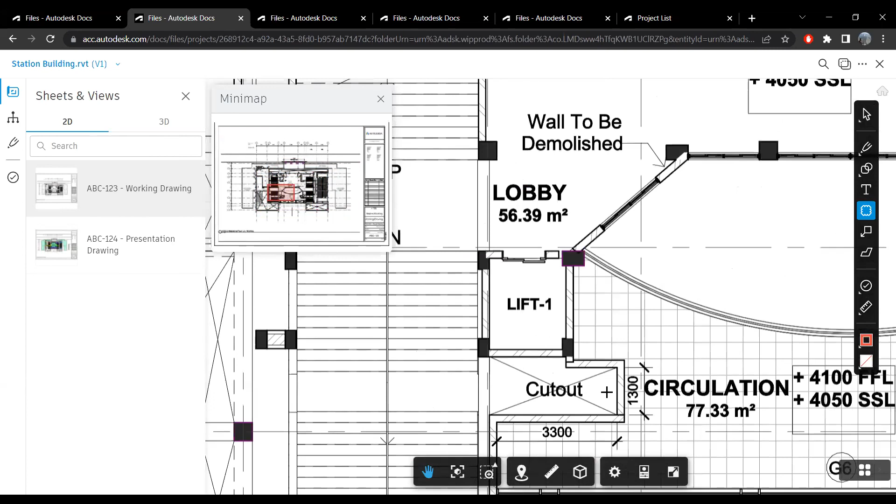There's one more thing available here in sheets which is not available in 3D - we can add revision clouds. For example, if this cutout size needs improvement, or there's some change in the lift size, there's a change in the lift, I can just mark up this with a cloud.

I can change the size of the cloud, for example. Suppose the color of the cloud needs to be, let's say, not red, but any other color, let's say blue or something. I'll just change the color for now. And you can change the opacity of it. For example, I'll just keep it opaque, and you can also change the border thickness.

You can also control its fill if you want to fill it. For example, it will always be a transparent fill so that it will be visible to all. So I'll just fill a small color here, any color, turquoise maybe.

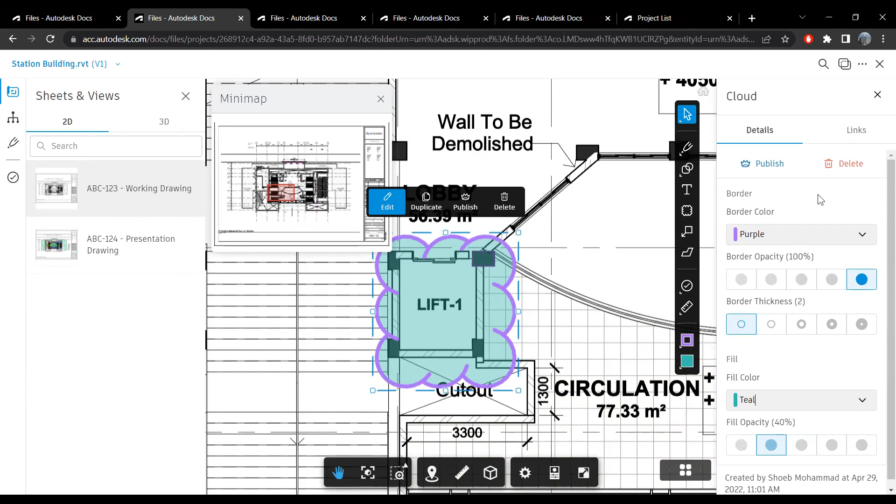And then this is the markup, and we can also add text in this. For example, I'll add a text here. The text size is too large, I'll take up smaller text. I think markup options are also added to text. I'll switch to text. I'll not use border, and I'll not use color in this case, no fill, and I'll change the text in this case.

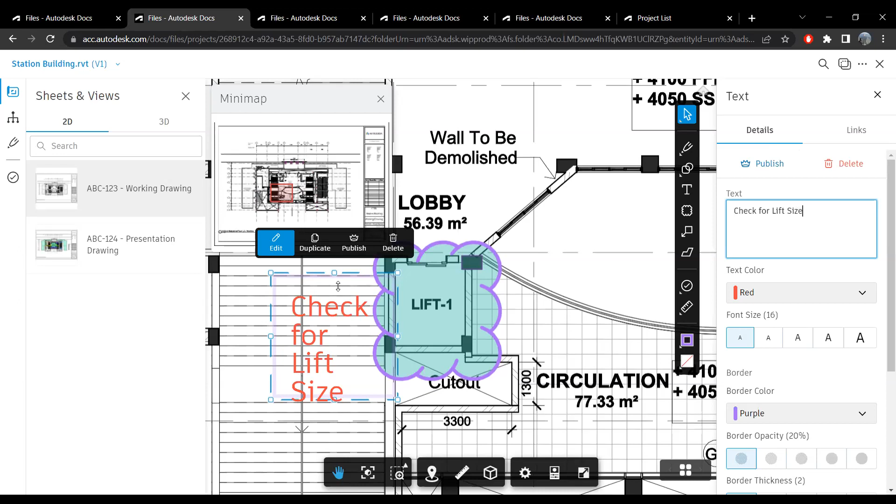I'll just move it out. I'll just change the text, for example, check for something like that. Check for lift size, suppose it's something like that. I'll add it, and we can keep this text along with this cloud.

And now this can be published if you want, or cannot be published if you do not want to publish it, and you can also link other references here as well. This is same as issues, but it appears in drawings actually, because it is a revision cloud, so it's a cloud kind of thing. So if you are habitual of adding clouds, then you can add markups, and markups can also be published. If I publish this, it will be available for everyone to view, and if I do not publish it, this would be for my reference.

For example, if I'm working today and I need to continue from here tomorrow onwards, I can save these markups for my reference as well. Otherwise I can publish it. Once it is published, it will be visible to all the members available in this project. Anyways, there are other things you can do, I hope you can figure other things out.

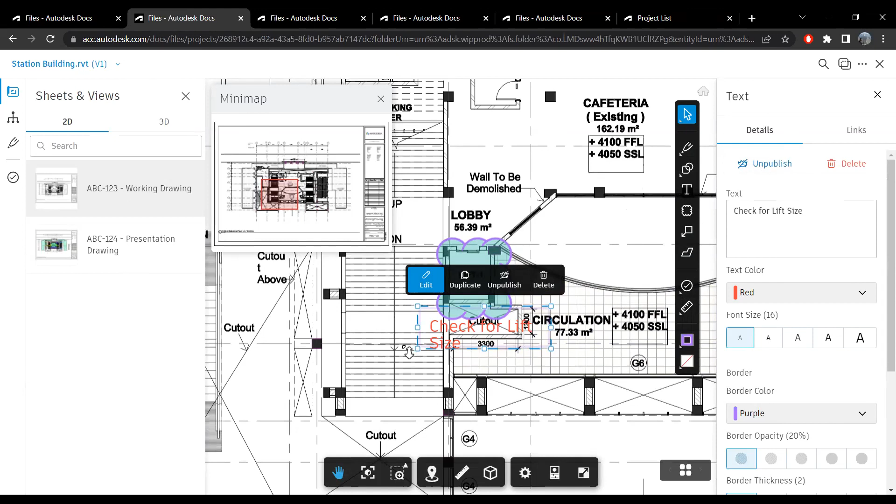So this is one drawing which is shown here. Another drawing is the presentation drawing which we created by filling the colors, and that drawing is also available here, with all the room legends. So if there are changes in these drawings, these will update automatically. So this was more or less the overview of this project which we have added here.

Then one more thing which I think is important for those who are from the client side and from the approver side: they can anytime add a multiple stage approval workflow. So if you need to add more members or lesser members, in that case you can go to the members list, and on the left side you can add members. If you are a project admin, then you can add more members.

For example, if I need to add more members, I can just write down their email IDs. For example, if I add one person from here and another person, let's say, so their email IDs are saved, and then I can simply add those members. I can assign them as admin or maybe some other role. So I'm assigning them as project admin, or maybe project members, you can assign them.

So members can have limited control, admin can do everything in the project. Members will have specific folder access, which for detail you can connect with us later, and we can help anyone who is interested in cloud setup. So for now, I'm just making both members admin. We actually give detailed trainings on these cloud-based setups as well.